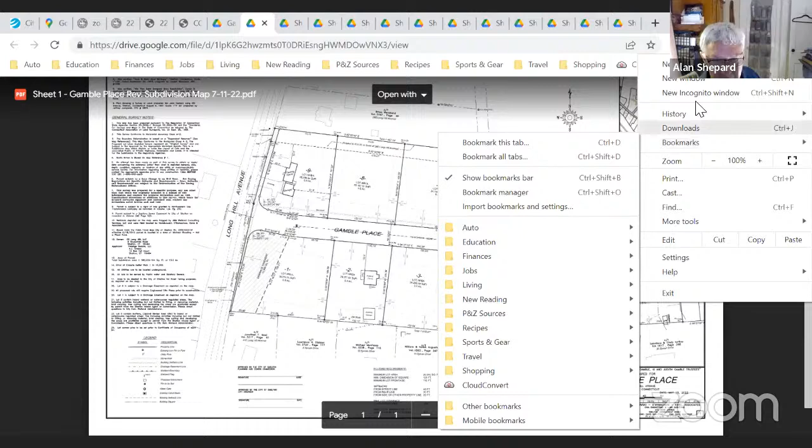The town engineer wanted some landscaping plans for detention areas. Mr. Shepard, before you go further, let's start with an overview of the whole project. Sure. Basically, this project asked for a zone change to R2 zoning because it seemed to make sense, and it also gave opportunity for a large half of the property to be given for open space, which made a lot of sense. It's coming off a long hill, the road we call Gamble Place. There are 9 lots, but 2 houses already exist, so really it's only 7 new additional building lots—a straightforward road, not very complex.

As you can see from the plan, there are 2 existing houses. Lot number 2 will probably be knocked down and rebuilt—it's kind of dated and old. Lot number 9 is fine and will stay. So basically, the layout is a dead-end cul-de-sac, giving about half the property away for open space.

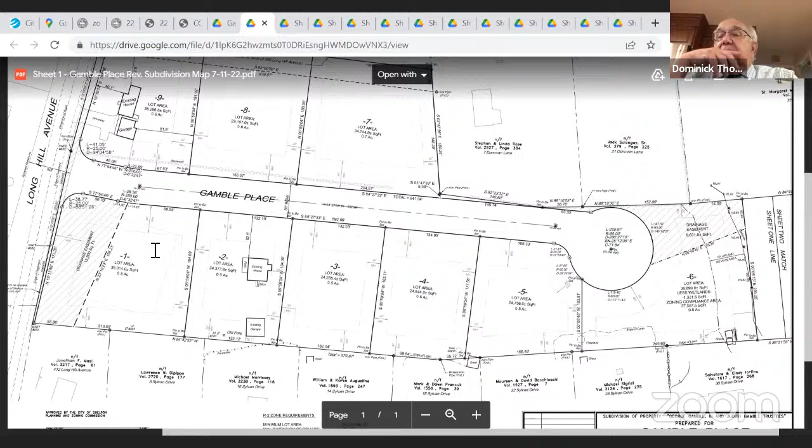What was that last section about, half the property for open space? Right, which you don't see on this map—it's on the other maps. The subdivision map is two sheets, so I want to mention there's another sheet showing the open space. There you go. So we have a large piece of open space all the way down to Constitution Boulevard.

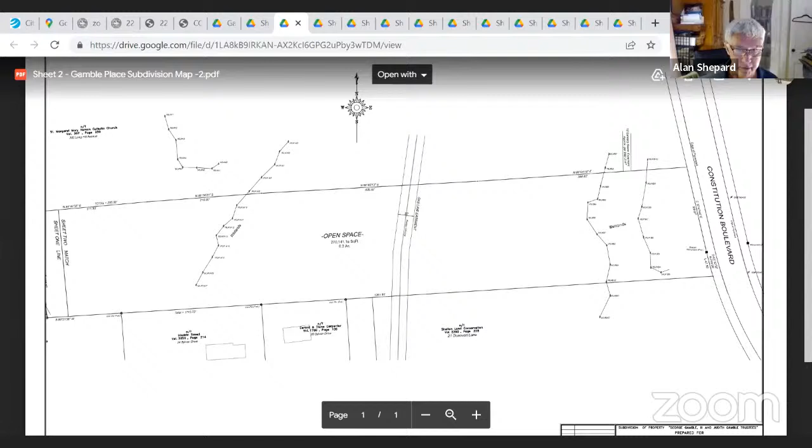That we don't, because of the zone change, we don't need to go down there. I think it's the best for all worlds. And it's in between other open space, and the church, so it makes sense to give the 6.2 acres.

Is that going to be conveyed to the city or to? To Shelton, whoever they want it to. Okay, yeah, we have no preference, whatever the city wants. Okay, no preference, all right.

Could you address this that's up on the screen about the Conservation Commission wanting a split rail fence along the boundary between lot 6 and the new open space, so that lot 6 is all the way down? We're fine with that. There's a pretty good slope and there's no reason to go past that slope.

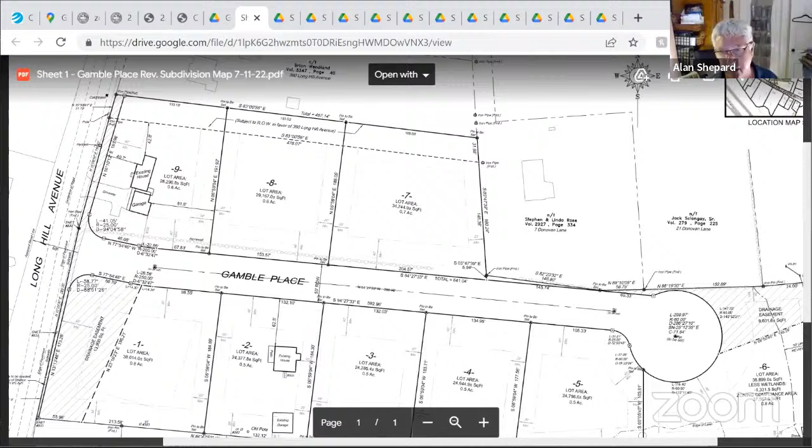So that's the last lot on the right. And if you take a look at lot 6, I drew the property line along the wetland line, so there's no reason to go past that line. That's a total slope, but a little split rail fence there, I don't think we have any problem doing that.

Who has to maintain that? If John lets you put the split rail fence in the wetland, yeah, I think he'd be okay with that. And even if we put it on this side of the property line, I don't think that'd be any problem. If we put it on lot number 6, it actually would be lot number 6's fence. But I doubt they'd maintain it per se, but at least you get them going for a while.

They, meaning the property owner? The property lot owner of lot 6? Yeah, it's more to designate the area. I think it's pretty well defined out there in the field, but it doesn't hurt. It establishes the property line so no one can say, oh, I didn't know.

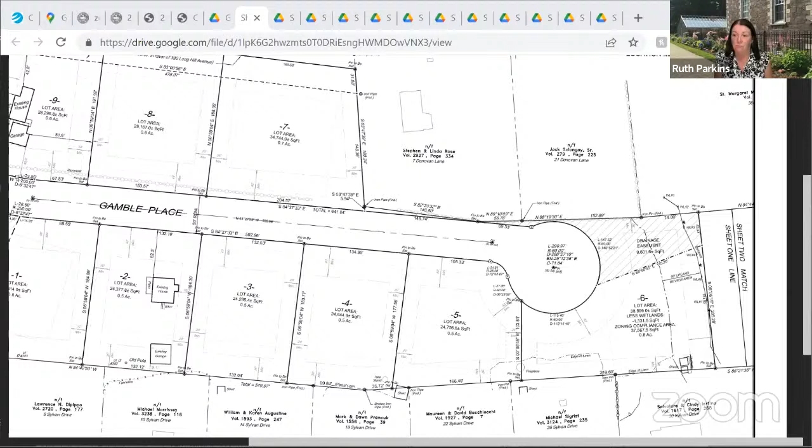Okay, well, somehow it should be deeded that that fence belongs to the City of Shelton so that they don't think it's their fence and can take it down and encroach. Yeah, that's what my whole point was, the encroachment has happened before. Right. Usually there are markers, as pointed out, that can be put on the fence to indicate that on the other side of the fence is the open space.

It would be a decision on the part of the Conservation Commission—well, they don't make decisions, they recommend—or the town, as to whether the fence is installed on the open space, which would make it the responsibility of the town to maintain, or put it on the side of the property owner, which would obligate the property owner to maintain it. Then there could be placards right on the split rail fence with the appropriate instruction that it is the borderline with the City of Shelton open space.

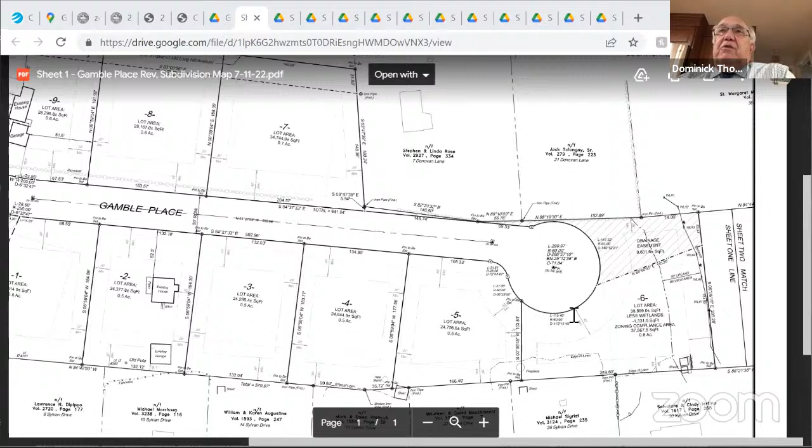Is there a formal inspection program that exists that checks things like this every so often? That would be a question for the Conservation Commission. Right, so who owns the other open space that this is abutting? I believe it's the Shelton land—if Alex can go to the open space map, I believe it shows it, it's the Shelton Land Conservation Trust.

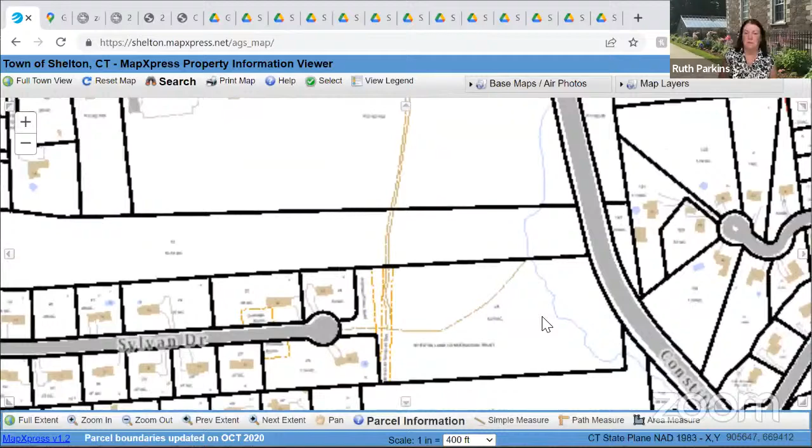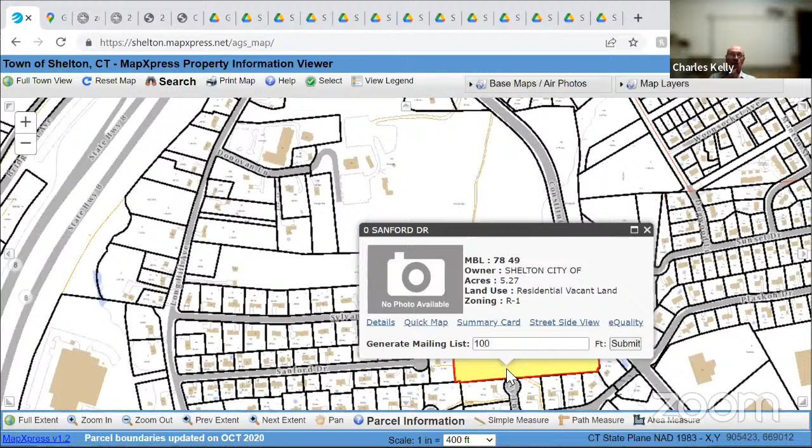So if the city deeds it to them, then they would become responsible for the fence. Correct. The other side is St. Margaret Mary, the other side is the Shelton Land Conservation Trust, which is the open space required for the PRD along Sylvan Drive. It would kind of make sense that it would be deeded over to them, but there's no guarantee the city will accept it. It's the city's choice. But they are, of course, under your subdivision regulations and statutes, one of the entities that can receive open space required for a subdivision.

I don't think we should put the responsibility of the fence onto the owner of the property, to be honest with you. No, true, I agree. Can we look at the subdivision map?

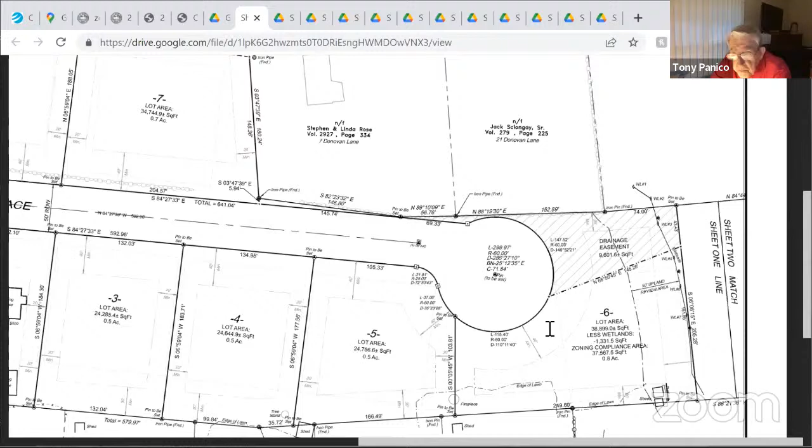Al, is there any reason why you shouldn't change the location of that rear property line to parallel the wetland line, so that the wetlands are all within the protected area? I guess I just picked that spot because it's at the toe of the hill, but there's no reason. If you change that line so that it follows the wetland line, it could be a straight line, then the fence on the line is not a problem.

Could you point that out on the map, what Mr. Panico is referring to? He's talking about the rear lot line for lot number 6. I went into the wetlands a little bit for the rear lot line, but it basically mimics the wetland line. What he's saying is just pull it off a foot or so off the wetland line.

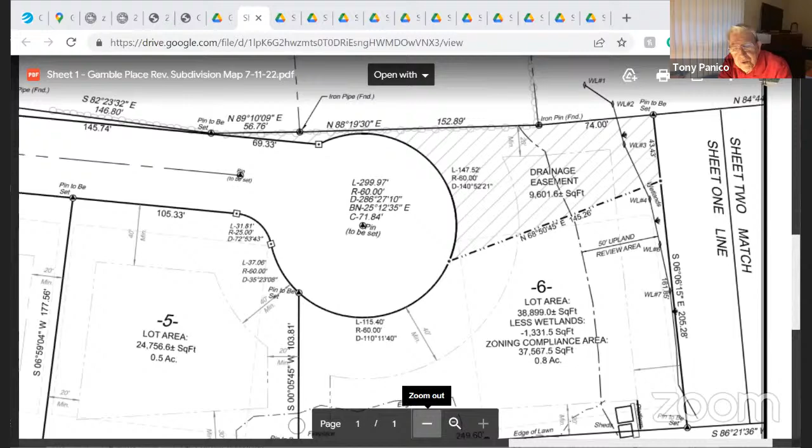While we're talking about lines, can I make a couple of other comments? I haven't spent a lot of time with this yet, but two things jumped out at me. Number one, the space between your cul-de-sac and the nearby piece of road is beyond the right of way of the road. It's in some kind of private ownership, and it would appear to be a blocking strip for those two adjacent properties. I think the right of way line of the road ought to be brought to the property line and follow it, because you've got this other triangular piece too, which looks like a blocking strip for that Rose property. That's one issue.

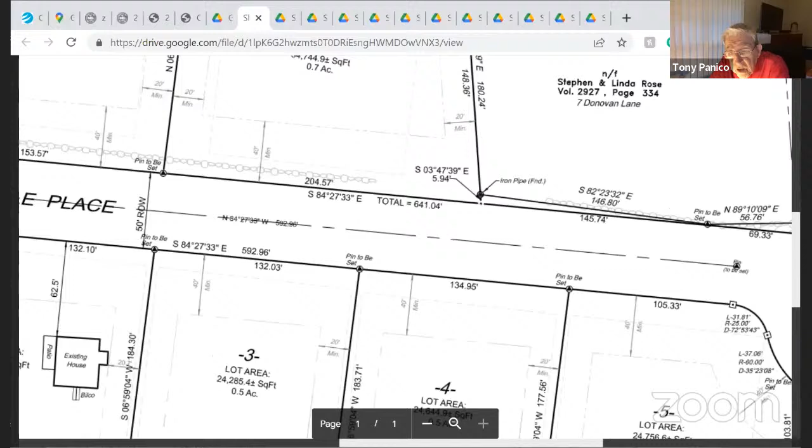The other issue, it seems rather obvious: you've got a stone wall paralleling this road, and yet you didn't put the right-of-way line of the road on the stone wall. So I think what you need to do is just make the right-of-way of Gamble Place a little bit oversized there and move that line to the stone wall.

I think with the grading, if you take a look at the grading plan, I'm more likely to maintain that stone wall where I have the road right now. I'm not saying move the road out, leave the road where it is, just make it a larger right of way. Just put the northerly street line on the stone wall.

I believe the Conservation Commission expressed some concern about protecting that stone wall also. Yeah, they did. So rather than having to go through creating a conservation easement to protect the wall, if the property line is on the wall, then the wall belongs to the city as much as the property owner.

Could I point out that lot number 9, I need that setback for the street line for the garage? Is that a problem? Yeah, I think so. Can we shift the map over to see that? So if you take a look at the garage setback, I got it pretty tight to the street line there.

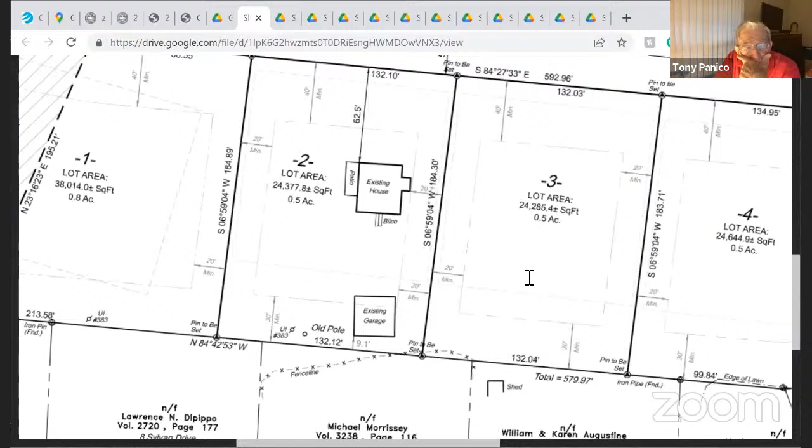Is that the 40 foot required street line in that zone? Lot 9 - I mean, 40 feet is a required street setback? Yeah.

So that's kind of, and I moved it over, but also the grading allows me to. Is there a change of grade along that wall? When I come in off of Long Hill, there's some, not much, but enough that if I tried to force it right up against the stone wall...

I wasn't suggesting, Al, that you change the construction of the road. You can leave the road exactly where you've designed it. Just draw the right-of-way line over at the stone wall, make it an oversized right-of-way. We could do that for lot number 8 and lot number 7.

Either that, or for lot number 9, we sponsor you for a variance from the ZBA. I think AJ has time considerations with people trying to get in with mortgages and stuff.

There's also a provision, I think, Al, in the zoning regulations that says when you have a lot on the corner of two streets, the street setback only applies on one side. That's for the smaller zone, not this zone. Oh, I think it applies anywhere. I'm just pulling this off the top of my head, I'd have to go back and look it up.

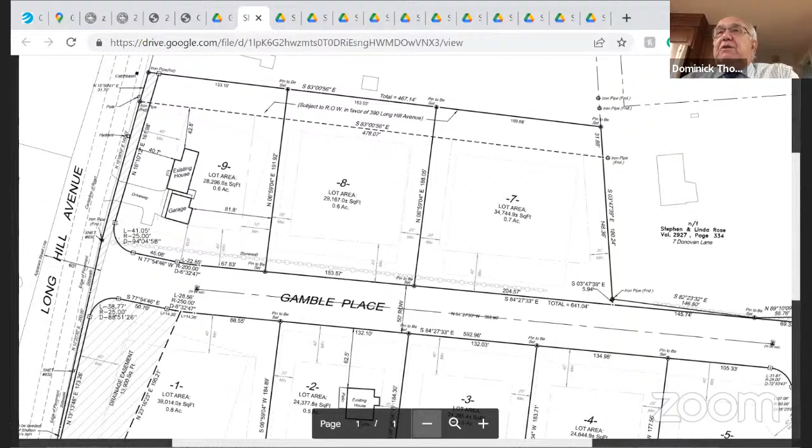That could be a condition in the deed. You'd have to put some kind of restriction. I kind of like that better. And with respect to moving the road line, I don't think the client wants to. I understand what you're saying, Tony, about those little pieces of property, but the client would rather keep the road line not on somebody else's property and leave the lines the way they are. There's a point where it goes across it, but would rather leave the area and the property. The whole point is we're not doing this to give access to other properties to the road or anything like that. Well, then protect it with an easement.

Excuse me, can I make a point? This is AJ Grasso, the applicant, living at 14 Red Tail Court in Shelton. The access—I don't see a need, both of those pieces of property, Tony Panico, that you're talking about, the one beyond lot number 7 and the one adjacent to lot number 6—they both have legal access on Donovan.

Well, I'm just telling you right now, we have specific requirements in the subdivision regulations that say you don't create blocking strips, and that has every impression of being a blocking strip. Well, it's not a blocking strip because they have access on Donovan. Of course it's a blocking strip to the back of that property. A blocking strip, yeah, well, they both have access on Donovan. All right, you want to defend it legally, Dominick, go ahead. Okay.

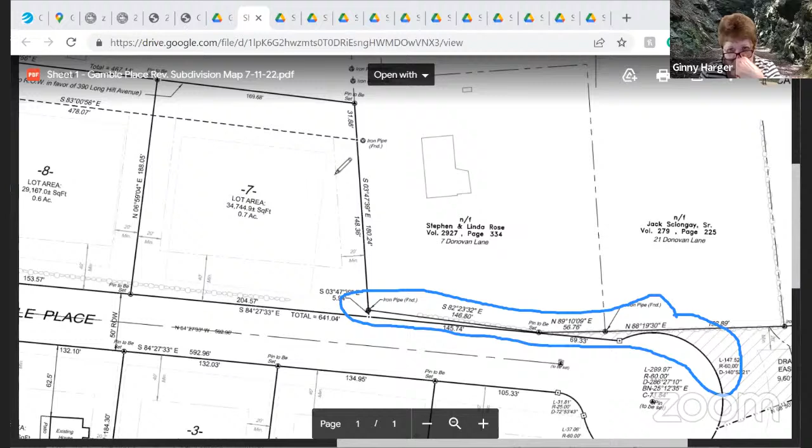Can we see more of the Sciongay property? I think it's a long property that goes all the way over to the road up to the church. Move it down. Yeah, the other way. The map doesn't go that far—it won't show on this map, right?

But the Rose and Sciongay properties have access from Donovan Lane. There you go, Sciongay's access is onto Donovan Lane. Okay, and it's obviously bigger than one lot—it's an oversized, large piece of property.

Click back on that. So they could divide it and then they wouldn't have access to a road? Is that what you're getting at?

No, I'm on that. It's been a principle of planning that when you lay out a subdivision, you don't create blocking strips to abutting properties.

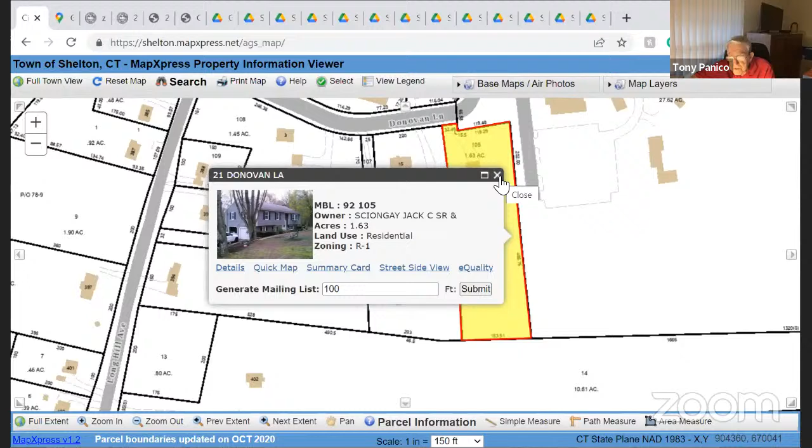And that's what we would be doing here with the map, the way it's currently designed. They have the acreage to split that lot in half if they could have access to the new road. But if they don't have access to the new road, they can't split that property because they'd have no access.

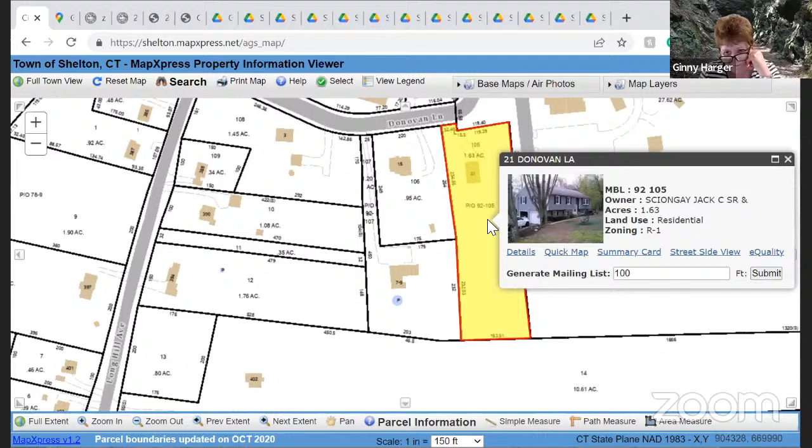That's right, which is why they don't have the acreage, and there are some other challenges associated there.

If you were successful in getting the zone change to that property line, I'm not sure it would be too difficult to extend that zone into that property, and then you have more than one lot. Well, exactly, that property was part of the zone change and was rejected.

Along with it, because they felt that it was gerrymandered at the time. But maybe it's consistent with an overall rethinking of that area. Personally, I agree it should have been included.

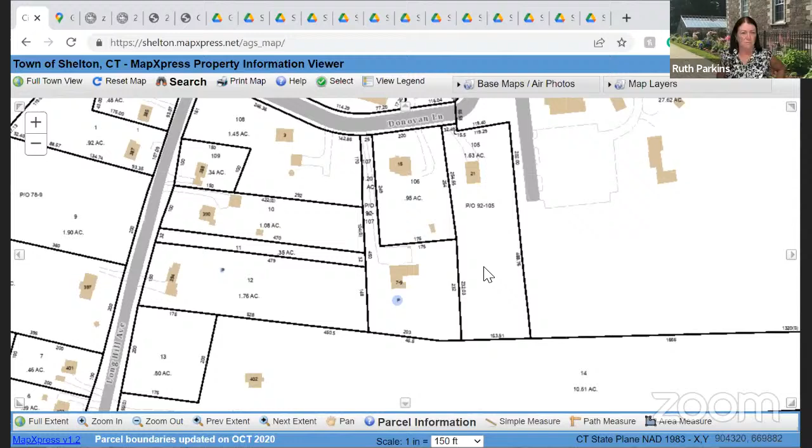I agree, Tony. So would the developer have any issues if at some point in the future there was a zone change and this particular Sciongay lot was able to be split with it having access to Gamble Place? It's a very simple thing to resolve.

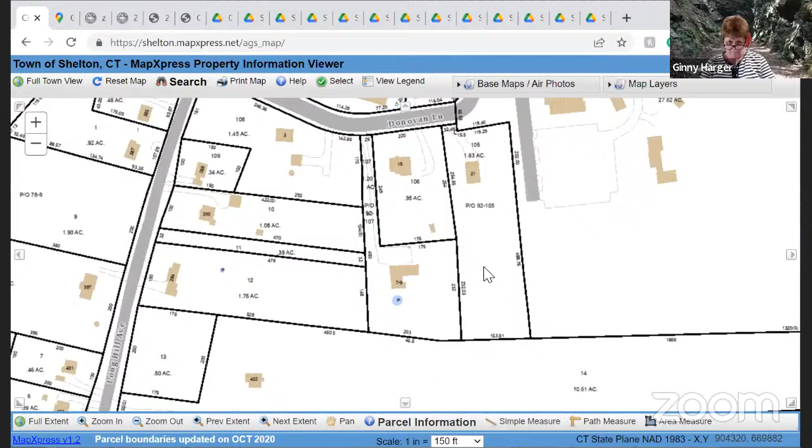All you need to do, if we can get back to the subdivision map, is whatever land is left between the future street line and the back line of Rose, convey it to Rose. And the same way on the next piece, draw a line and convey whatever intervening space there is to the property owner.

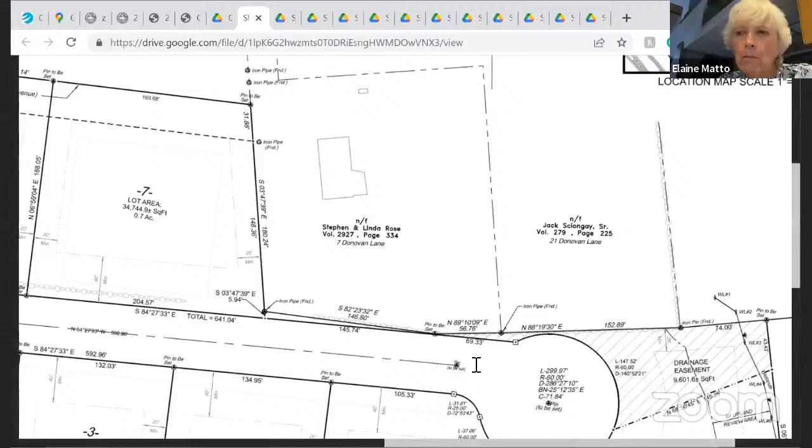Has that ever been done? Then you've eliminated any possible accusation of having blocking strips. Well, that doesn't give either Sciongay or Rose legal frontage on the street anyway.

It might, but I don't know if Rose is an interior lot to begin with. I don't know that either one of them become a lot with frontage because they don't. I'm not looking to create development potential for them. I'm just simply fulfilling a principle of subdivision design that you do not create blocking strips.

Blocking strips are from years ago. They were spite strips. We don't get spite strips anymore. There's a couple of things - these are not spite strips; spite strips prevent a property from having access to a right of way.

The Rose property is an interior lot. If you give them frontage and they want to all of a sudden change and put a driveway, then you're destroying a stone wall, because that's the only way they could do it, is get rid of the stone wall that they have on their property, which is the continuation of the other stone wall.

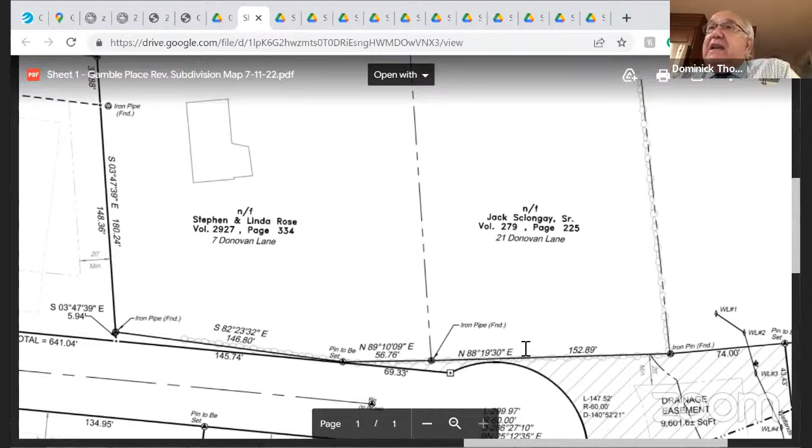The same thing, I believe, I'll defer to Alan. Along the Sciongay property, you have the stone wall on there. So where they don't need it or anything, if they're doing it, you're now giving them the opportunity to cut a driveway in and take down the stone wall. Well, you're doing that to other properties up above as well.

We're arguing circles for nothing. I don't see what the big problem is paying for that little bit of property. What's the problem? One thing in regards to, let's start with the Rose piece.

That would allow them to put a driveway off a new road that we created, which could impact the property owners on the new road. But is it going to be a public road, AJ? Yes. Then they should have rights to it.

How high are those stone walls? In other words, AJ, is it a spite strip? Well, no, they have a driveway to the house now.

I don't, but 100 years from now somebody might have a different idea. They might want to have a different house there, and they might want access to this particular road rather than the other way to go in. Exactly, and they would look back and say, how come that planning commission left the spite strip there?

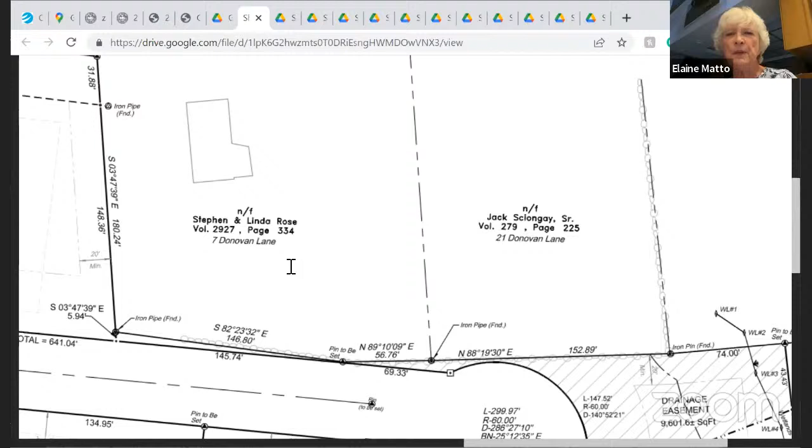I don't see why this is such a big issue. I don't see why you can't just do this. It's not a big issue... it's because those stone walls that are there.

Yeah, but there's stone walls up above as well. You're not going to do anything to the stone wall. It's talking about how you draw lines. That's all it is.

But are these stone walls of such historical significance that removing them in the future would just be for a driveway? Yeah, that's what I'm asking. You would think most people would want to keep a stone wall. It's the developers that tend to take them down unless they're told not to.

I think the stone wall is a different issue on this to begin with.

I'm not sure what the answer is regarding the garage. I believe for that house it faces Donovan, or it might be parallel. I'm not sure if it's perpendicular to that property line or not, so I don't know the answer to that. Maybe Dominick does. I don't know why we're getting hung up on the existing condition. Who knows what the condition is going to be like a year from now, five years from now, ten years from now?

As someone said a little while ago, somebody may decide they want to tear down the house and build a brand new house facing the new road. Are we saying we don't want that? We should, because if you are, then move the road away from the property line.

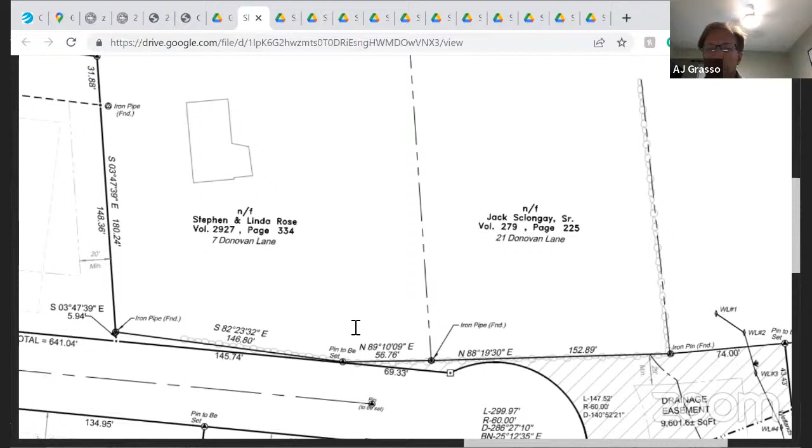Does that stone wall stop, or is it just because? Right, the stone wall has less to do with it, I think, than the reality that they can go to the left of that stone wall. Looking at the plan, if they want to put a driveway in, if that now connects.

Dominick, your thoughts? Yeah, I understand the position Tony is putting forth, and AJ's position is about not giving these people access to the other road when they in fact have access. Both lots of the Rose property—there's an interior lot and a front lot—both have access onto Donovan. So I don't treat it as a spite strip, because they have access. Spite strips are where somebody does not have access and you're depriving them of that access.

Under current zoning, I will admit, Sciongay can't have a rear lot—he has the house up front and doesn't have enough to qualify for the rear lot. I understand he could possibly get a zone change.

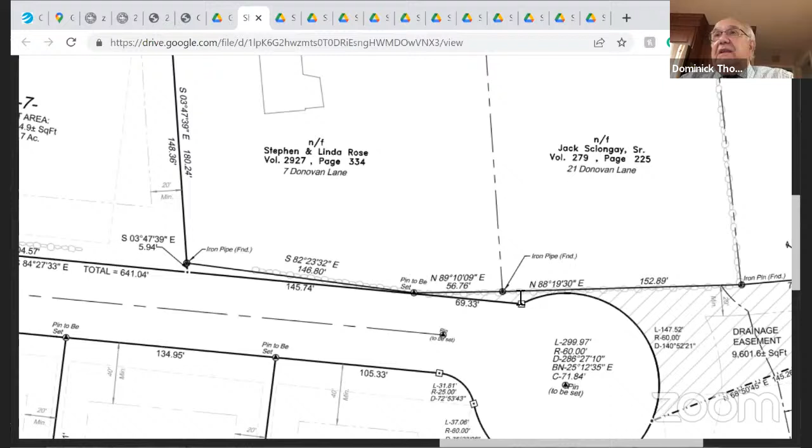I think the other thing, if you're going to—I'm not sure about the topography—but if there's the potential for curb cuts, these properties adding curb cuts or driveways off of it by having it touch would also have to be looked at. Not by the city engineer necessarily, but obviously they would have to go to the city to get permission to have curb cuts.

But again, AJ is the property owner. He's laying out the road like this. I don't think these are spite strips because there is access, and I don't think requiring him to do it would be an appropriate subdivision condition.

Okay, well, I get that he's paying to build the road, but it's going to become a city road and the city will be maintaining it. So a resident on that road should be able to have access to it—that would be my thought. I agree completely with Ruth and with Tony. Okay, well, if it's made a condition, the applicant will have to address it.

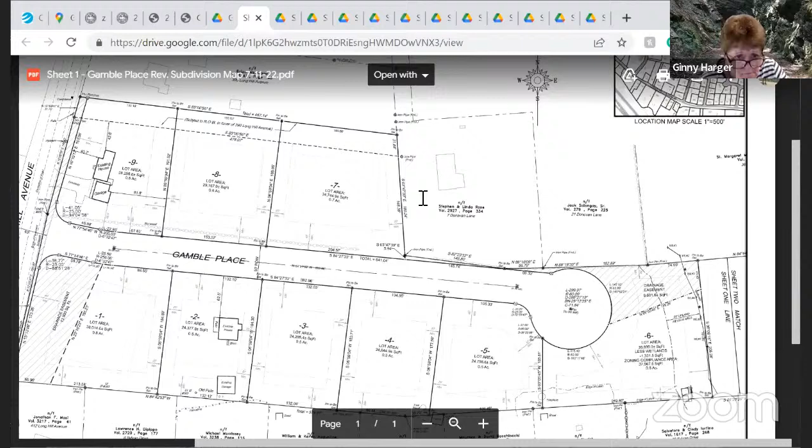Okay, anybody else want to comment on that particular topic? Okay, if not, Attorney Thomas or Mr. Shepard, do you want to move on? Was there something else? Do you guys want me to go over the comments from the town engineer real fast? Yeah, go ahead.

So the first comment was he wanted landscaping details for the detention areas, which we provided. Both detention areas are at a very mild grade, so they're not going to look like the typical riprap detention areas. You won't even know what their purpose is when you drive by. They're on lot number 1, you can see the drainage easement there, and lot number 6. So it'll look good going by, is my point.

We've increased the pavement width to 30 feet. We're going to ask for a waiver to go to 26 feet. I don't know how the board feels about that, but we made it 30 because that's the reg right now. We may feel out the board and see how you feel about it. So what you're saying is the road width right now is planned for 30, but you would be asking for it to be reduced to 26?

If there's some concessions with the board, we would like that. You have the requirement for pavement, which I think is completely excessive but benefits the asphalt companies, at 30 feet. A lot of towns have gone down to much lesser asphalt, less drainage issues. I don't think there's any issues here going down to 26 feet. But in your subdivision regulations, toward the end, you have the right to grant waivers if a waiver is requested. The client does not want to delay the approval, but it can be discussed, and if you have no problem with it, we can immediately submit the request for the waiver, or submit it orally as part of this application.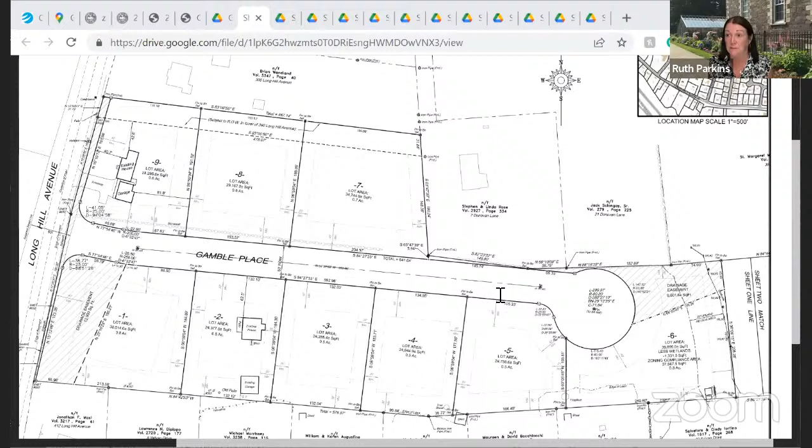I think the wider roads, especially in a small subdivision where people can't have 12 people park in their driveway, so people park on the street, then a 30-foot might be needed. But this tends to be just excess width that makes people drive faster, in my experience. No, I live on a 26-foot wide street and it's fine. That's a different opinion.

Yours is what, Elaine? I have my street at 26 feet wide. It's fine. And Mr. Shepherd, what were you asking for, reduction to 26 or 28? 26 feet. But like we said, it's up to the board, we'll go either way. My opinion is when you have 20,000 square foot lots, people can park in the driveway. When we're on reduced lots, I like the 30 feet. But on these lot sizes of a half acre and above, I like the narrower roads. But we'll go with whatever the town wants.

The 4 feet is not going to be added to any lot, correct? It's just a pavement width, doesn't affect property lines. Right. All right, we were going to ask for the reduced cul-de-sac, but I agree it's a dead end cul-de-sac, so we upped it back to the 50-foot radius. That's not a problem since it is a dead end street. You want a detail of a stop sign, that's not too exciting, and a stop bar, we added that. With the handicap detail for the sidewalk, we added that too.

We want a new bituminous curb along Long Hill Avenue and sidewalks, and we agreed to that. So we just put a note on the plan for that. There's a sidewalk along Long Hill Avenue already, but it's kind of old, so he wanted new ones on our side of the street, along our frontage.

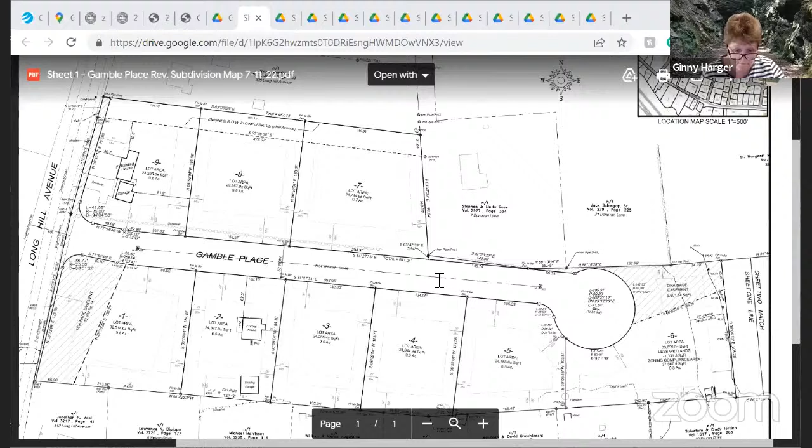So does any commissioner have any questions for Attorney Thomas, Mr. Shepherd, or Mr. Grasso?

Excuse me, can I make a point? The smallest lot we have here is a little over 24,000 square feet. We've got a lot that's over 34,000 square feet. It's a permanent dead end by giving away 6 acres to conservation.

I would like to ask that we go to a 26-foot wide road if at all possible. And also, if the commission wants me to bring those property lines adjacent to the road line, we will do that.

What was that last one again? So you wanted to bring what Tony Panico was asking for. The blocking strips? We will eliminate that. We can bring the road line to the property line. Okay.

So I guess, Al, what do you redraw? You'll redraw, you'll increase, you're going to basically gift that to them. How do you accomplish that? I would like to give it to the town first, because I'm not sure the property owner even wants it.

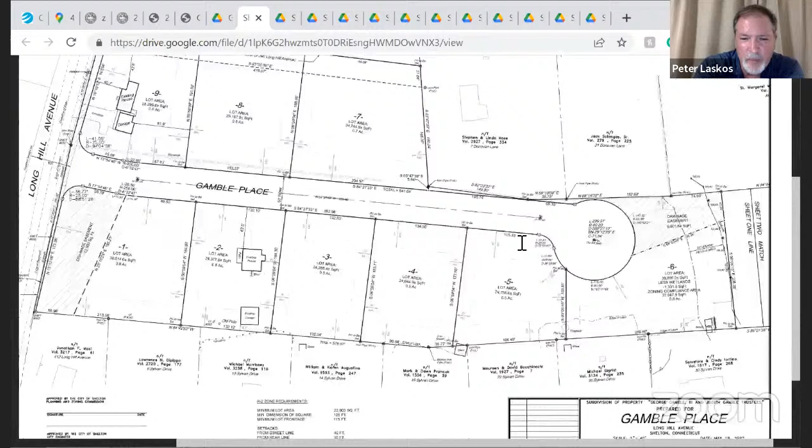They intruded. What's the proper way to handle that, Dominick? Well, there are encroachments that people would have to be given notices for, because it's going to become an issue when you go to sell the property. So if the property has been surveyed and marked, notices should immediately be given to the people encroaching that they are encroaching, and request they remove the encroachment.

Isn't there a statute of limitations on that? Adverse possession - they could potentially claim adverse possession under certain circumstances if it's been there for 15 years. So if they have a permit for the shed pulled 15 years ago, they don't have to move it? Not necessarily - if they don't have a permit for the shed, that's a separate issue. But if they put the shed down across the property line, they still have to comply with certain other requirements to establish their claim of adverse possession.

Okay, so they can make the claim of adverse possession. If they do, it can be handled in several ways. Most people want to move the stuff onto their own property. If not, there could be a lot line adjustment or something like that. But the first step at this point is to put the people on notice that they are encroaching across the property.

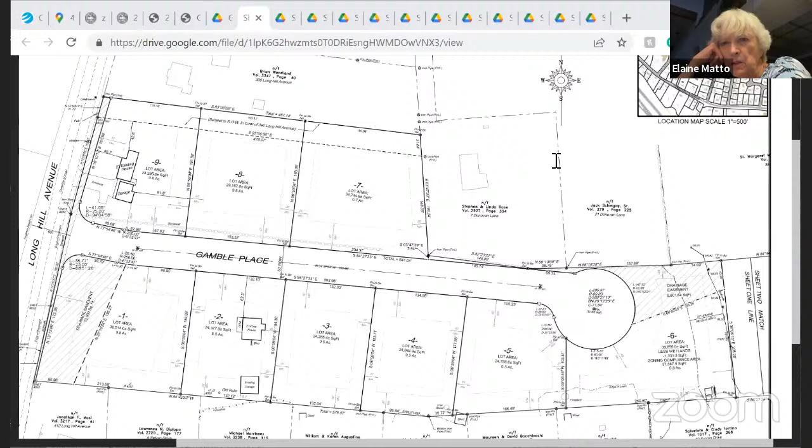Since we're on that topic, what do the other commissioners feel about reduction to a 26-foot wide road? I'm fine with it. Yeah, I'm fine with it as well. Yeah, I could live with that for sure. Commissioner Kelly, you're the only one I didn't hear from.

Is there anybody else that wants to address the commission or the applicant on this? All right, so...

Do we have a consensus as to whether or not we should direct staff to prepare a favorable resolution on this or not? I would think so, with those stipulations we've been talking about. Commissioner Matto, Commissioner Laskos are in agreement. Commissioner Parkins, agreement. Commissioner Ticky, agreement, yes. Commissioner Kelly, agreement. Okay, all right.

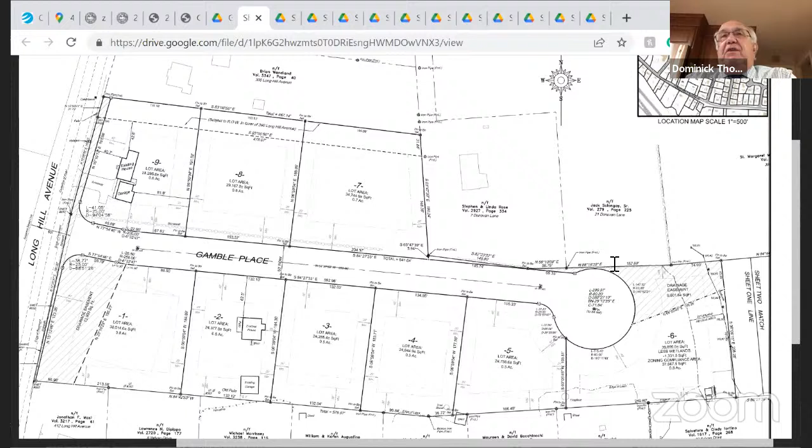So staff, I know there are some issues that Mr. Shepherd, Alan Shepherd, pointed out. There are some issues actually at the present time. The applicant has individuals who are anxious to sign contracts and move forward. I know you'd normally wait until your August meeting, which is on August 9th, but if at all possible, since it's just a resolution, if you could see fit to add the reading of the resolution and the voting on it to the July meeting, it might be helpful.

We're going to have to confer with staff as to what we have penciled in for upcoming subdivisions. That's a relatively simple decision. It may take the place of one of your other projects, Dominick. I think Alex has a standard form. It's obviously going to, but no, it's really a 10-minute item.

So that's all I was saying. We do have to give Mr. Panico time to develop the resolution, so keep that in mind, and staff will get back to the applicant as to when this can be. We understand the urgency having to do with paperwork for the mortgages and all that.

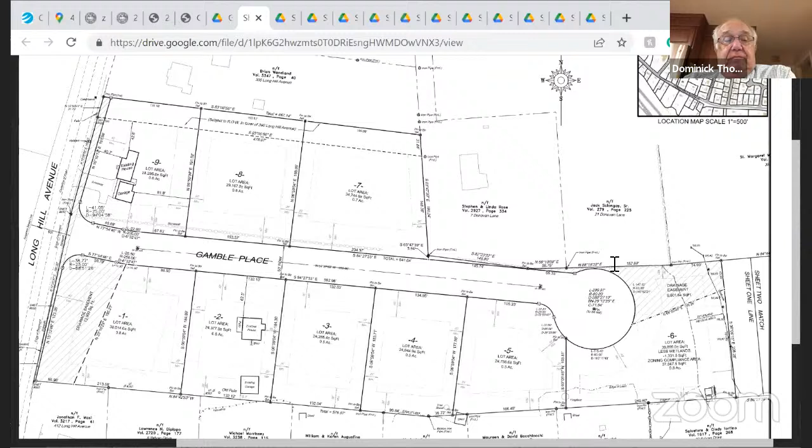So, all right, it's a consensus of the commission for staff to prepare a favorable resolution, and the meeting where it would actually be voted on will be indicated to the applicant by staff. So, before we move on, anything else we need to talk about with Gamble Place, Long Hill Avenue? Okay.

Attorney Thomas, you're on mute. Were you trying to say something?

Yeah, if you noticed, I stayed for this subdivision application, and I wanted to point out to the commission that if you look at a bird's eye view of this area, whether by drone or aerial flyover, the exception has pretty much gobbled up the rule here. You've got a situation where the commission down the road should consider changing this area from an R1 to an R2, in my opinion, because every lot there seems almost to be an R2 type situation.

I don't think it should be done as part of this subdivision. In fact, it can't be. But it is something I think the commission should consider, and I'd be glad to scope out the area that should be changed. I think it should go all the way down to Constitution Boulevard, because you have a situation twice now where you're approving lots down in size in an R1 zone. So you're treating it as an R2 zone for practicality purposes. You might as well have the rule be R2 rather than the exception be R2.

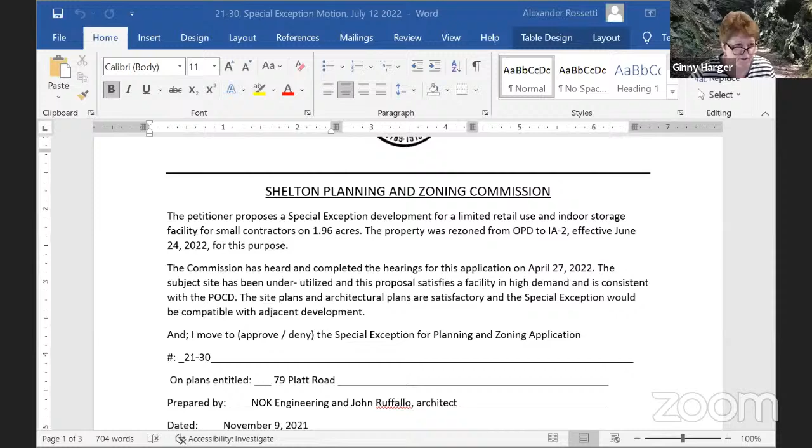Did you email that to each individual commissioner? Yes. Is that today? Exit, go full screen and into your inbox. Yeah, he's got it up on the screen though, right? Okay, yeah, all right, I'll go back to the screen. Whoops.

Okay, you want to read it? You want Commissioner Matto to read it? How do you want to do this? Oh, I gotta find... I need to get some more water.

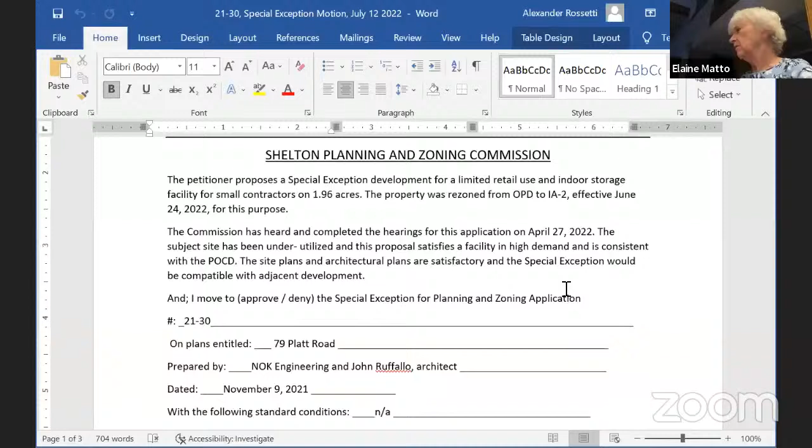As the chairman mentioned, this is for application 2130, a special exception application for a limited retail use and indoor storage facility on 1.96 acres. The property was rezoned from OPD to IA2 effective June 24th, 2022 for this purpose. As you'll likely remember, the commission split up these two applications to address the zone change first and then move forward with the special exception application.

We received updated elevations from the applicant regarding the two dormers to reflect the same side of the buildings, and everyone had been okay with the site plan and rear areas of the site plan. So we have received those updates, and of course, when the applicant comes in for permits, they'll need to go through the engineering, wetland, zoning, and building departments for the necessary permits.

The commission has heard and completed the hearings for this application on April 27th, 2022. The subject site has been underutilized, and this proposal satisfies a facility in high demand and is consistent with the plan of conservation and development. The site plans and architectural plans are satisfactory, and the special exception would be compatible with the adjacent development.

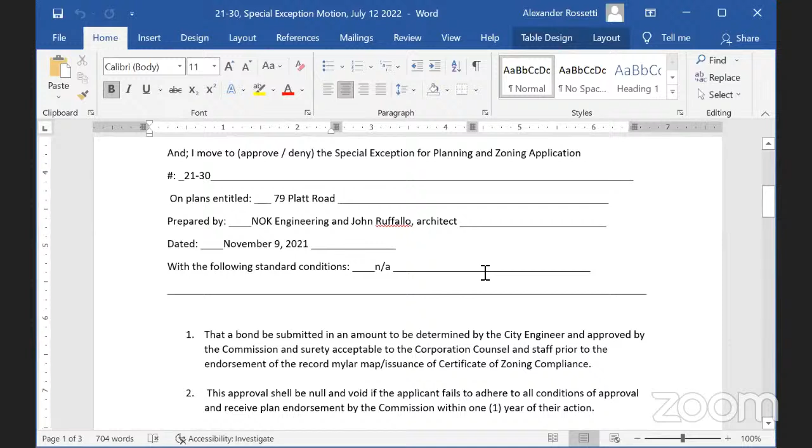So if there's a commissioner who would like to move to approve or deny the special exception application for P&Z application number 21-30, on plans entitled 79 Platt Road, prepared by NOK Engineering and John Ruffallo, architect, dated November 9th, 2021, with the following conditions.

A bond must be determined in amount to be determined by the city engineer and accepted by the commission, and surety by corporation counsel prior to sign off on the record Mylar maps. The approval shall be null and void if the applicant fails to adhere to all conditions of the approved endorsement by the commission within a year.

The approval shall be null and void if the construction and site improvements are not completed within 5 years of the date. Revisions and modifications are subject to the city department's review and may require action by the commission. Failure to notify the staff may result in a stop work order or other sanctions. The planning and zoning admin or city engineer must be notified 48 hours in advance prior to start of construction.

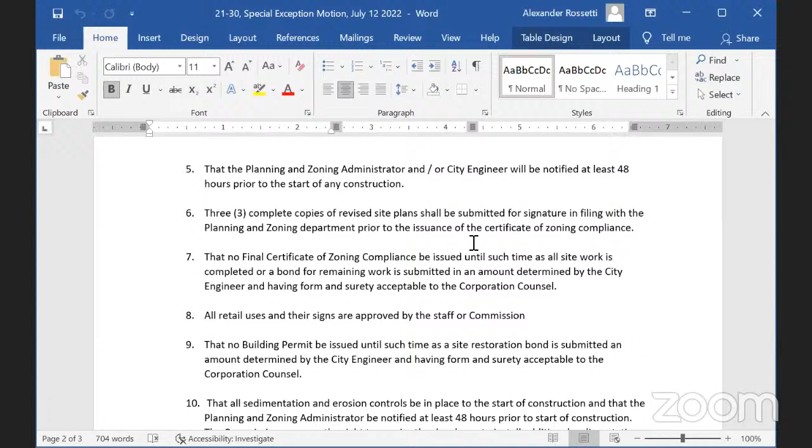3 copies of the revised site plan must be filed with our office prior to a certificate of zoning compliance being issued. No final CZC will be issued until such time as all site work is completed or a bond for the remaining work is submitted to the city. All retail uses and signs will be approved by staff and or the commission.

No building permit will be issued until such time as the site restoration bond is submitted in an amount determined by the city. All sediment and erosion controls will be installed prior to construction, and the commission reserves the right to require and request additional sedimentation and erosion control. Again, this site does not need much because it's already predominantly covered.

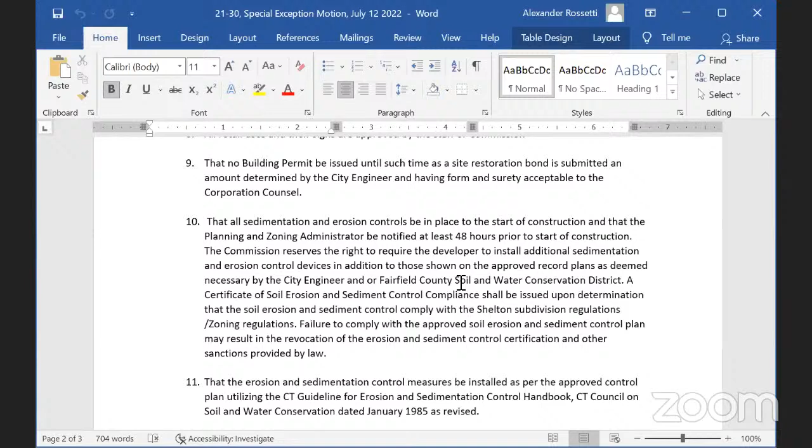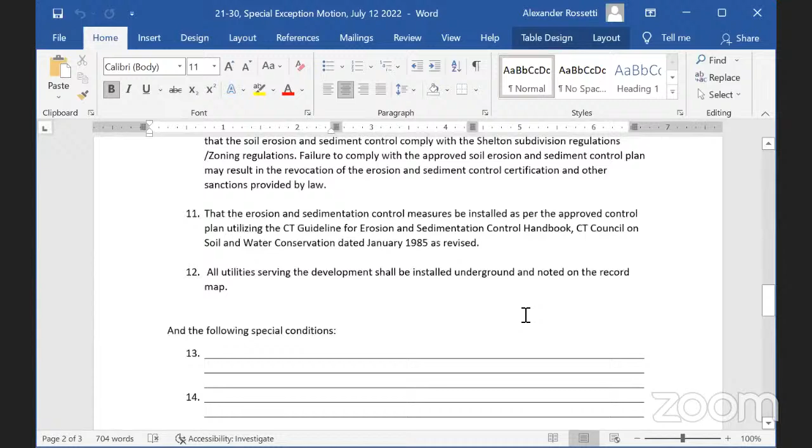Failure to comply with the approved soil and erosion control plans may result in the revocation of the erosion and sediment control certification and other sanctions provided by law. They will be installed per the state handbook, and all utilities serving development will be installed underground and noted on the record map. If there are any other special conditions, commissioners would like to add.

Alex, can you go back to number 8, please? I think I would like to see that expanded: all retail uses and their signs are approved by the staff or commission prior to any installation, or any manufacturing or installation.

Or the manufacturer thereof, fabrication or installation. That's the word. Prior to any fabrication or installation, yeah, perfect. I thought there was another one.

Just to point out that you had said for number 1 that the bond would be submitted in an amount determined by the city engineer and acceptable to corporation counsel. Does any commissioner have any modifications they would like to suggest for this?

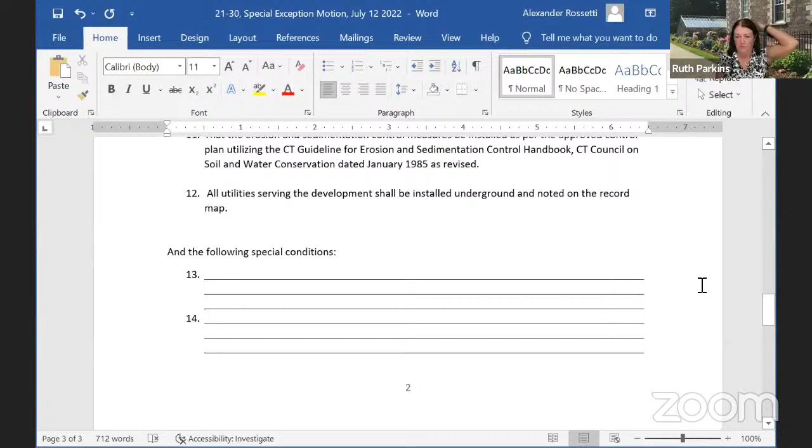I did not, but I will move for approval. Please get the motion on the table. Wasn't there a line up above at the very beginning? Yeah, there was. So I move to approve the special exception for planning and zoning application 21-30.

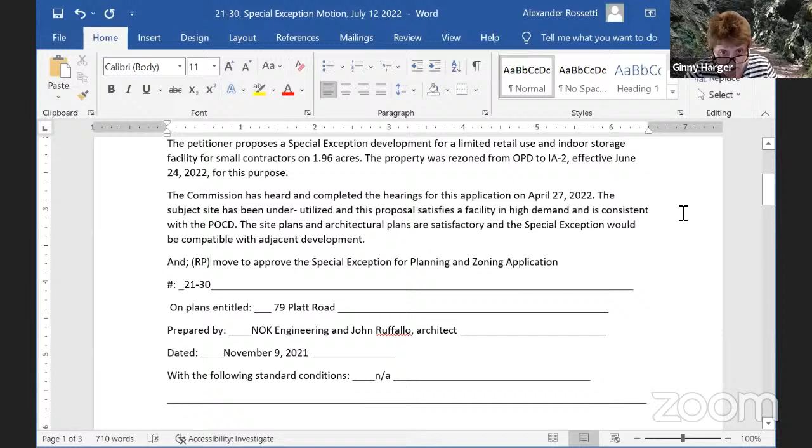Very good. Is there a second? I'll second it. So it's a motion to approve with the conditions set forth from Commissioner Parkins, seconded by Commissioner Kelly. Before we go on, what happened to the screen? Just had to type, hang on one second.

Mr. Panico, did you have any comments, questions, or concerns? No, Alex and I have been talking about this for the last couple of months. There's always last minute odds and ends that need to be taken care of, but they're purely administrative and staff will take care of them. So you're comfortable with the way the motion is worded? Yes.

On the motion from Commissioner Parkins, seconded by Commissioner Kelly for approval, I'll do a roll call. Commissioner Ticky, aye. Commissioner Matto, aye. Commissioner Lascos, aye. Commissioner Kelly, aye. Commissioner Parkins, aye. And the chair votes aye. Motion has been approved 6-0.

All right, we'll move on to old business item B. Application 2206, PDD number 101, Good Guys Development LLC at Petromont Lane and 275 Quorum Road, Assessors Map 66, lots 22 and 23, for a major modification of PDD number 101, 400 apartments with on-site parking.

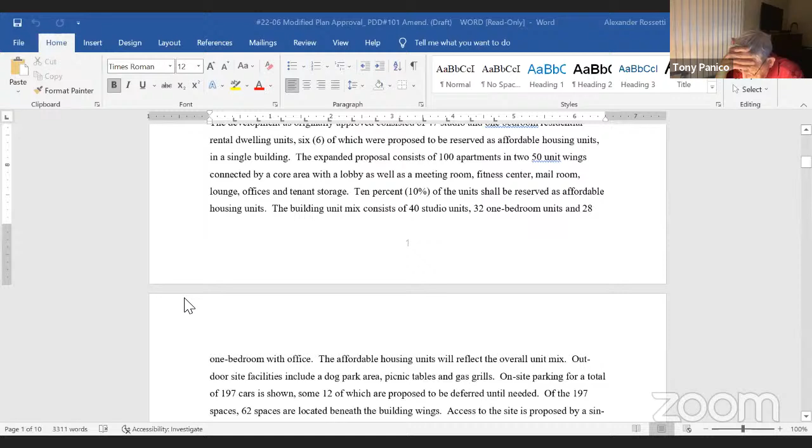The property is currently owned by the petitioner. The development as originally approved on PDD 101 consisted of 47 studio and one-bedroom dwelling units, 6 of which were proposed to be reserved as affordable, in a single building. The expanded proposal consists of 100 apartments in 2 50-unit wings connected by a core area with a lobby, as well as a meeting room, fitness center, mail room, lounge, offices, and tenant storage. 10% of the units will be reserved as affordable housing units.

The mix proposed consists of 40 studios, 32 one-bedroom units, and 28 one-bedroom plus office. The affordable housing units will reflect the overall unit mix. The outdoor site facilities include a dog park, picnic tables, and gas grills. There's on-site parking for a total of 197 cars shown, 12 of which are in an area they would like to defer until needed. Of the 197 spaces, 62 are located beneath the building wings, and the rest are open.

Access to the site is proposed by a single median divided driveway connection to Coram Road, with the potential for a separate emergency connection to Petromont Lane. The proposed building is positioned at the interior corner of the site with adequate setbacks from all property and street lines.

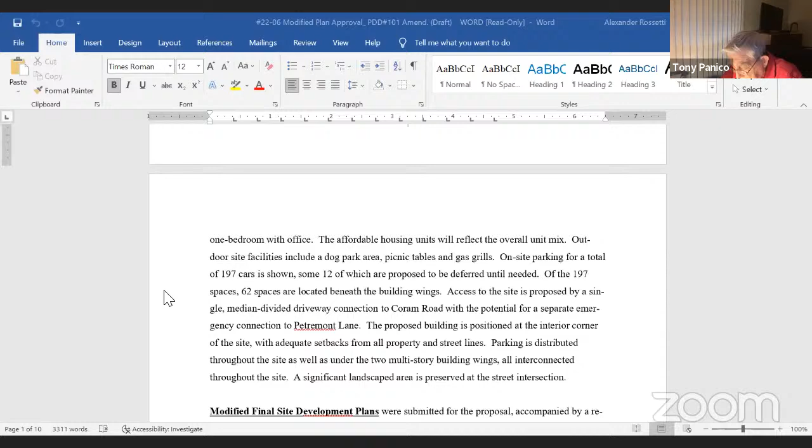Parking is distributed throughout the site as well as under the two multi-story building wings, and it's all interconnected throughout the site. A significant landscape area is preserved at the street intersection.

Modified final site development plans were submitted for the proposal, accompanied by a revised statement of uses and standards. Said plans are entitled 'Final Site Development Plans for Multifamily Residential PDD 101, Clock Tower at Petromont Place,' 275 Coram Road and 0 Petromont Lane, Shelton, Connecticut, prepared for Good Guys Development LLC by Rose-Tiso and Company LLC, Architects and Engineers, dated 6/3/2020, revised to 3/10/22. Also submitted was a site engineering and design report prepared by Manuel Jose Silva, professional engineer of Rose-Tiso and Company LLC, dated February 28, 2022, and the traffic impact study by KWH Enterprise LLC, dated February 2022.

The commission convened and concluded a duly noticed public hearing on April 27, 2022, at which hearing there was only one comment expressed by the public, and it was relative to stormwater discharge from the site.

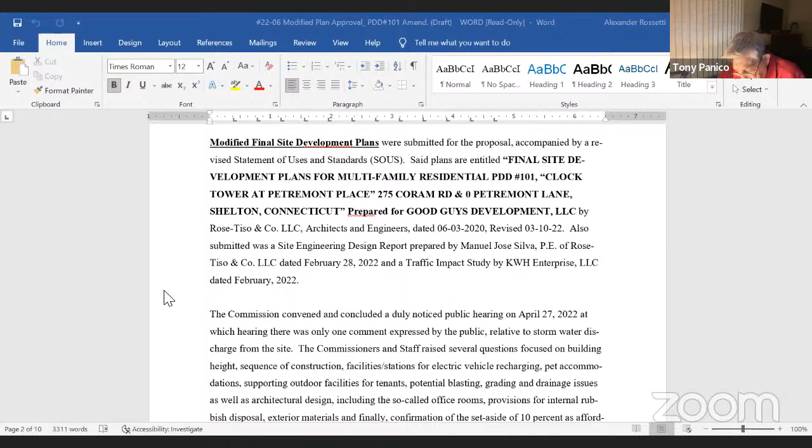The commissioners and staff raised several questions focused on building height, the sequence of construction, facilities and stations for electric vehicle recharging, pet accommodations, supporting outdoor facilities for tenants, potential blasting, grading and drainage issues, as well as architectural design, including the so-called office rooms, provisions for internal rubbish disposal, exterior materials, and finally, confirmation of the set-aside of the 10% as affordable units that meet the State of Connecticut requirement.

The applicant attempted to address all the comments and concerns of the commission and the public at the hearing. The applicant noted that if necessary, any and all other concerns of the commission can and will be addressed more fully to the satisfaction of the commission and all other responsible boards and commissions prior to endorsement of the modified final site development plans.

The commission has reviewed the subject modified final site development plans and is familiar with the area, existing site conditions, and area traffic patterns. It has considered how the site is proposed to be developed, public comments expressed, the existing land uses and zoning of adjacent parcels, and its impact on development of the subject site, and the concerns expressed by the commission at the public hearing and in its deliberations, and notes the following observations and findings.

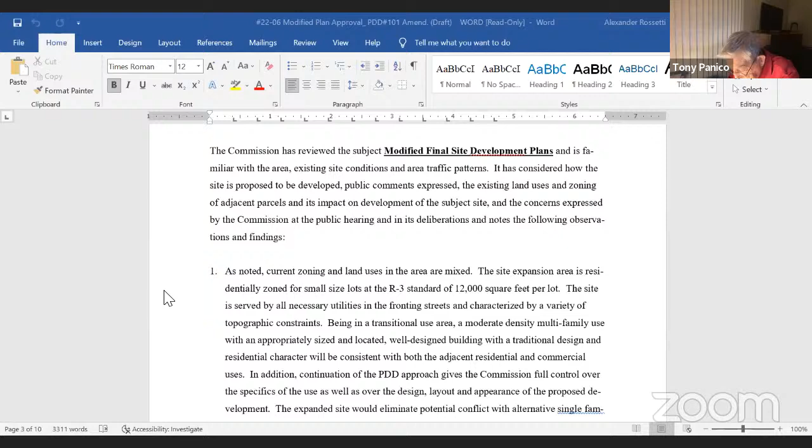In addition, continuation of the PDD approach would give the commission full control over the specifics of the use, as well as over the design, the layout, and appearance of the proposed development. The expanded site would eliminate potential conflict with alternative single-family development that might occur on that portion of the site adjacent to Coram Road.

Number two: the subject 3.54 acre site is roughly rectangular in shape, and it's somewhat impacted by topographic constraints. Development of the site must be carefully designed to produce an attractive solution and an appropriate transition between different land uses.

Required utility services continue to be available on Petromont Lane as well as now on Coram, and all on-site utilities will be located underground. All stormwater runoff will be collected and conveyed to underground galleys for detention and cleansing prior to discharge to the existing stormwater drainage system in Petromont Lane. There are no inland wetland regulated areas on site; however, the initial Inland Wetland Commission approval of proposed grading and off-site discharge has been received. The approval of the Shelton Water Pollution Control Authority for the proposed discharge into the sanitary sewer system has been applied for and is awaiting final WPCA approval.

Three: although a thorough discussion of Petromont Lane physical conditions and traffic flow patterns confirmed the position of the commission that, regardless of the relocation of the proposed entry to Coram Road, Petromont Lane must be improved.

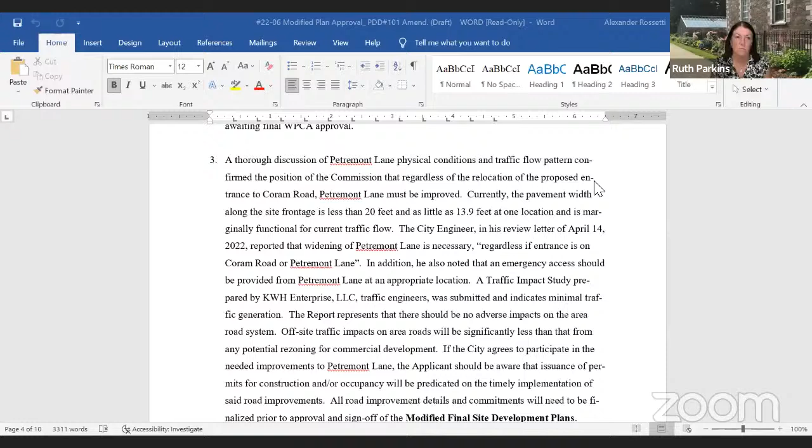The city engineer, in his review letter of April 14, 2022, reported that widening of Petromont Lane is necessary, quote, regardless if entrance is on Coram or Petromont. In addition, he also noted that an emergency access should be provided from Petromont Lane at an appropriate location.

The traffic impact study prepared by KWH Enterprise traffic engineers was submitted and indicates minimal traffic generation. The report represents that there should be no adverse traffic impacts on the area road system. Off-site traffic impacts on area roads will be significantly less than that from any potential rezoning for commercial development.

In other words, if the applicant had sought a commercial proposal, it would have generated far more traffic than the residential one does. If the city agrees to participate in the necessary improvements to Petromont Lane, the applicant should be aware that issuance of permits for construction and/or occupancy will be predicated on the timely implementation of those road improvements.

All road improvement details and commitments will need to be finalized prior to the approval and sign off of the modified final site development plans.

Four, the final mix of units proposed will be 40 studio units, 32 typical one-bedroom units, and 28 one-bedroom plus office units. The 100 units must include not less than 10 units allocated as affordable units in compliance with requirements set forth in the Connecticut General Statutes and consistent with the overall unit mix.

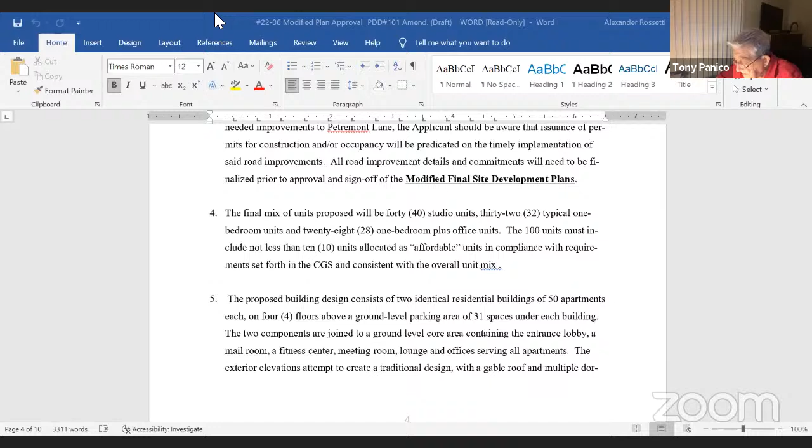The exterior elevations attempt to create a traditional design with a gable roof and multiple dormers, utilizing architectural asphalt roof shingles and an exterior of thin brick masonry elements, horizontal vinyl clapboard siding, and vinyl shingle siding, as noted on the elevations and represented on the rendering that was provided.

Some further modification will be required for clarification primarily, and possible expansion of the masonry components and the introduction of some partial screen walls at the building end walls, in an attempt to minimize the visual impact of the parking that occurs beneath those buildings.

The overall building height from ground level to the top of the roof is approximately 59 feet, except for the 2 roof features above the elevator shafts, which of necessity project a little higher.

Further specifics concerning the exterior materials and finishes, including samples, may be required, and revised detailed architectural drawings must be prepared for submission to satisfy the conditionally approved modified final site development plans. There are just some architectural elements that I could not quite understand from the drawings, and I need to have them explained to me.

Number 6, the commission notes that the site plan layout is generally acceptable, subject to minor clarification and detail. First of all, the site curbing is labeled as, quote, extruded concrete curbing, typical, unquote. It should be specific as to Portland cement concrete, since the detail sheet only shows bituminous concrete lip curbing.

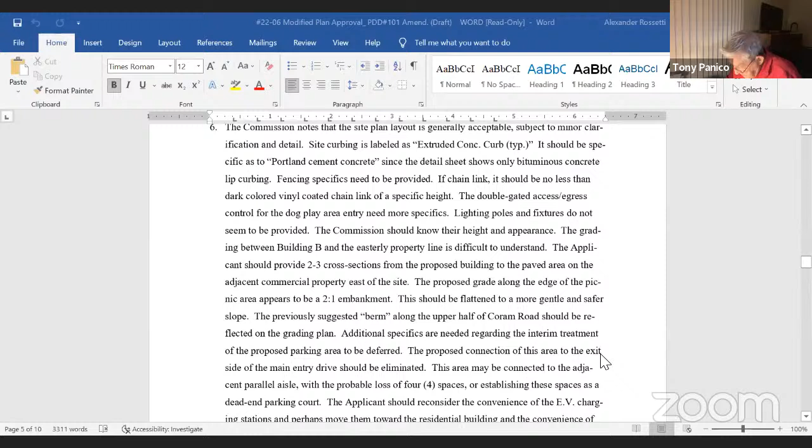Additional specifics are needed regarding the interim treatment of that proposed parking area, to be deferred if in fact that's what happens. The proposed connection of this area to the exit side of the main entry drive should be eliminated—it's not a good place for it. This area may be connected to the adjacent parallel aisle, with the probable loss of 4 spaces, or establishing these spaces as a dead-end parking court.

The applicant should reconsider the convenience of the EV charging stations and perhaps move them over toward the residential building and the convenience of its elevator access.

The landscape plan will require further strengthening and revision, as well as more notes. The tree size should be increased slightly to, say, 3 to 3.5 inch caliper, with a slight reduction in spacing considered. There aren't an awful lot of them, so they should be more substantial. Additional enhancement of the entry drive should also be considered.

The applicant needs to explain to someone, to me, the purpose of a 6-foot fence that's shown from the end of the retaining wall out to Petromont Lane. I'm not quite sure the purpose or the function of that fence, and I need to have it explained.

All of these various concerns, however minor they are, need to be addressed on the modified final site development plan, and achieving those solutions should include commission and staff involvement when necessary.

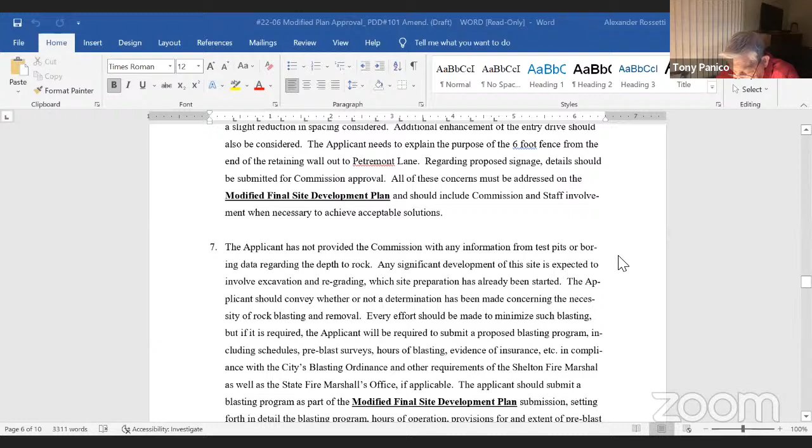The applicant has not provided the commission with any information from test pits or boring data regarding the depth to rock. We still don't know anything more about it. Any significant development of this site is expected to involve excavation and regrading, which site preparation, by the way, has already been started. The applicant should convey whether or not a determination has been made concerning the necessity of rock blasting and removal. Every effort should be made to minimize such blasting, but if it is required, the applicant will be required to submit a proposed blasting program, including schedules, pre-blast surveys, hours of blasting, evidence of insurance, etc.

All in compliance with the city's blasting ordinance and other requirements of the Shelton Fire Marshal, as well as possibly the State Fire Marshal's office. The applicant should submit a blasting program as part of the modified final site development plan submission, setting forth in detail the blasting program, the hours of operation, the provisions for and the extent of pre-blast surveys, blast monitoring, the times of blasting, and insurance coverage, etc.

So it's paramount that they find out where and how much rock they're going to be dealing with, and how much of a program we need to have to cover it.

Number 8: the plans were referred to the fire marshal, the WPCA, the police department, and the city engineer for their review and comment. The city engineer worked with the applicant to address the major concerns or reservations with the stormwater management system. All final outstanding concerns of staff and municipal departments must be addressed prior to commission endorsement of the modified final site development plans.

Number 9: the statement of uses and standards needs minor revision and modification relative to the area dealing with permitted uses, the area dealing with the zoning compliance table, the section dealing with parking, and some provisions relative to signage, in order to clarify certain language and to assure consistency with the context of the currently adopted statement of uses and standards presently applying to PDD 101.

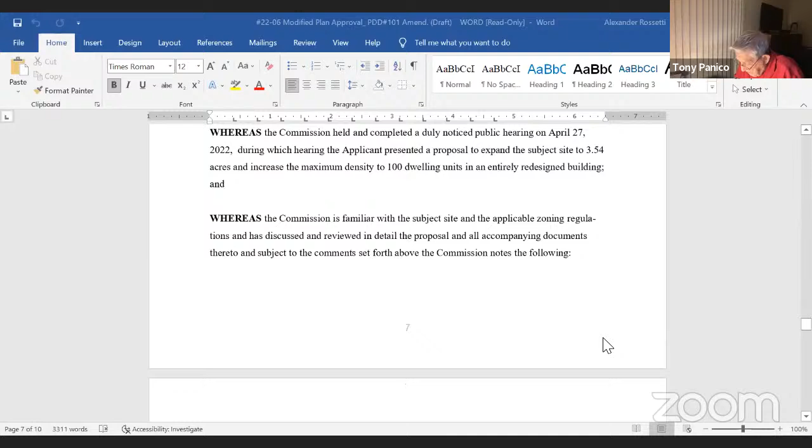Whereas the commission is familiar with the subject site and the applicable zoning regulations, has discussed and reviewed in detail the proposal and all the accompanying documents, and subject to the comments set forth above, the commission notes the following: 1, the application complies with the applicable zoning requirements and the specific provisions and stipulations of PDD 101 as proposed to be modified. 2, necessary final approvals of inland wetlands, water pollution control, and the city engineer will need to be confirmed, and a favorable report has been submitted by the fire marshal.

Modified final site development plans will require further modification and revision to address concerns and limitations set forth above. All concerns identified during the ongoing review and plan modifications need to be resolved prior to the submission of modified final site development plans for the commission's endorsement of its approval.

3, the site is currently vacant and it is characterized by variable topography with all necessary utilities available at the site. The proposed stormwater management plan satisfies the city ordinance, adequately addresses stormwater drainage issues, and proposes to discharge into underground galleys prior to connecting to the existing system in Petromont Lane.

4, the expanded site is positioned in a transitional location between and opposite developed commercial uses. The expanded development proposal and residential apartment building design is subject to careful review and control under the provisions of a Planned Development District, assuring it will successfully transition from the commercial development to the single-family residential development.

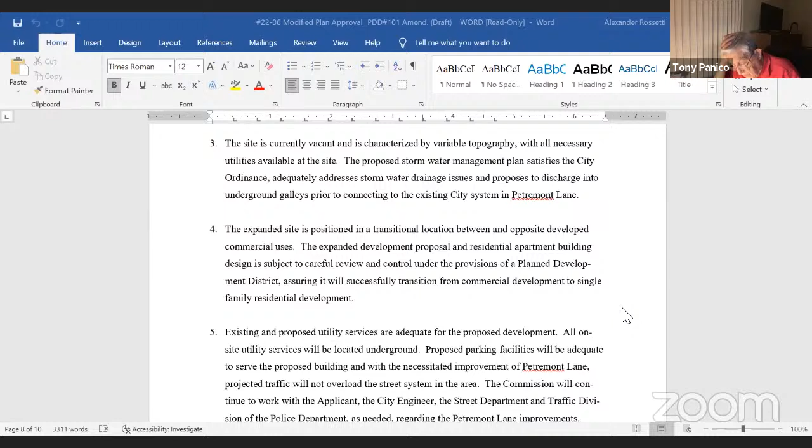5, the existing and proposed utility services are adequate for the proposed development. All on-site utility services will be located underground. Proposed parking facilities will be adequate to serve the proposed building. And with the necessitated improvement of Petromont Lane, projected traffic will not overload the street system in the area.

The commission will continue to work with the applicant, the city engineer, the street department, and the traffic division of the police department as needed regarding the Petromont Lane improvements.

6, the submitted modified final site development plans with further refinement will address all the outstanding concerns of the commission, the fire marshal, the city engineer, and all other applicable municipal boards and commissions. If significant blasting is required, a detailed program addressing all aspects of the proposed blasting must be provided.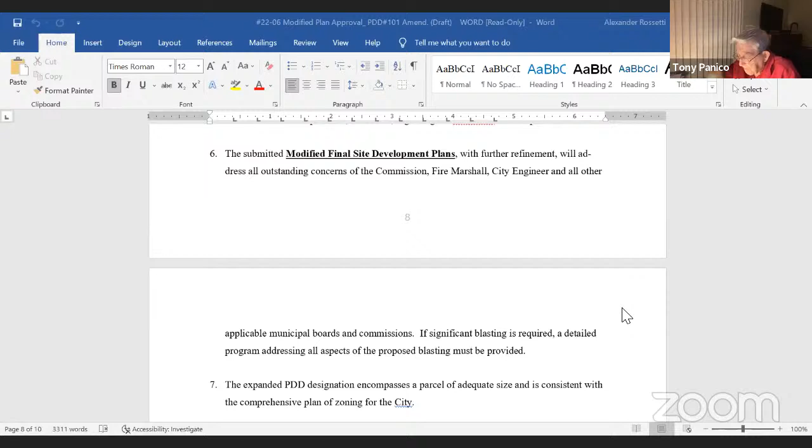7, the expanded PDD designation encompasses a parcel of adequate size and is consistent with the comprehensive plan of zoning for the city. Now, therefore, on the basis of the above, the representations made at the public hearing and other discussions with the commission, the Shelton Planning and Zoning Commission hereby takes the following actions. And we have 2 actions to take.

A, in accordance with the provisions of section 34 of the Shelton zoning regulations, the subject modified final site development plan is hereby conditionally approved, subject to the following modifications, stipulations, and adjustments.

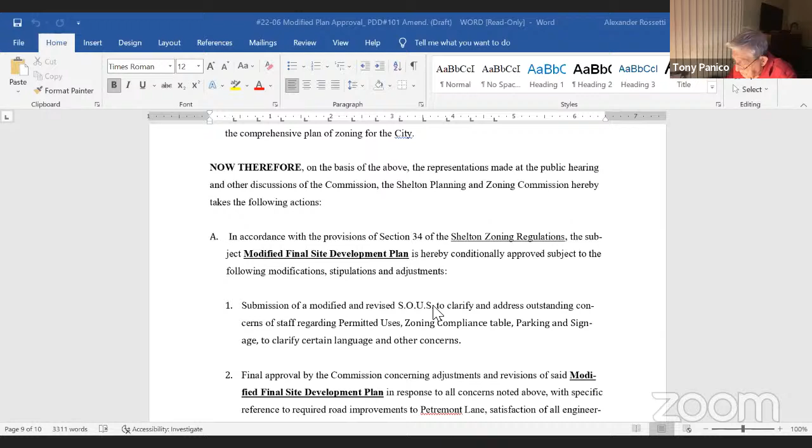1, submission of a modified and revised statement of uses and standards to clarify and address outstanding concerns of staff regarding permitted uses, zoning compliance, parking, and signage, and to clarify language and other areas of concern.

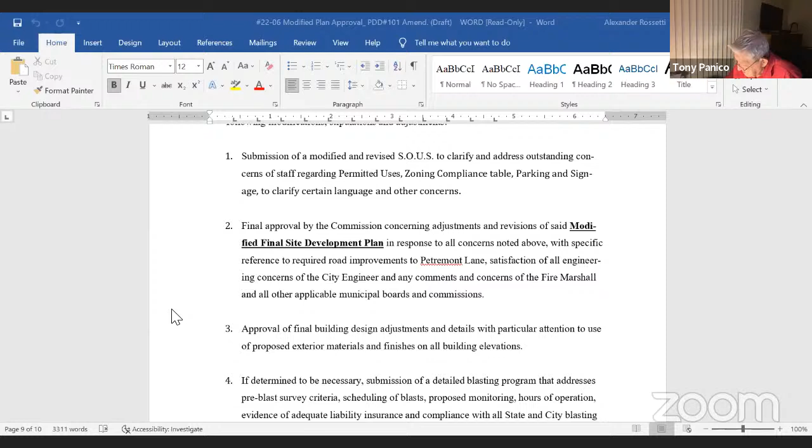2, final approval by the commission concerning adjustments and revisions of the modified final site development plans in response to all the concerns noted above, with specific reference to required road improvements to Petromont Lane, satisfaction of all engineering concerns of the city engineer, and any comments and concerns of the fire marshal and all other applicable municipal boards and commissions. 3, approval of final building design adjustments and details with particular attention to the use of the proposed exterior materials and finishes on all the building elevations.

4, if determined to be necessary, submission of a detailed blasting program that addresses pre-blast survey criteria, scheduling of blasts, proposed monitoring, hours of operation, evidence of adequate liability insurance, and compliance with all state and city blasting ordinances.

And 5, posting of appropriate bonding in an amount as determined by the commission upon recommendation of the city engineer to assure site restoration and/or completion of critical site improvements and other areas of concern.

A separate performance bond is required to guarantee the completion of all off-site improvements to public streets and infrastructure. And a separate bond is required to assure the installation and maintenance of any and all required on-site sediment erosion controls that have to be posted and continued in effect until completion of site construction and restabilization of ground surfaces.

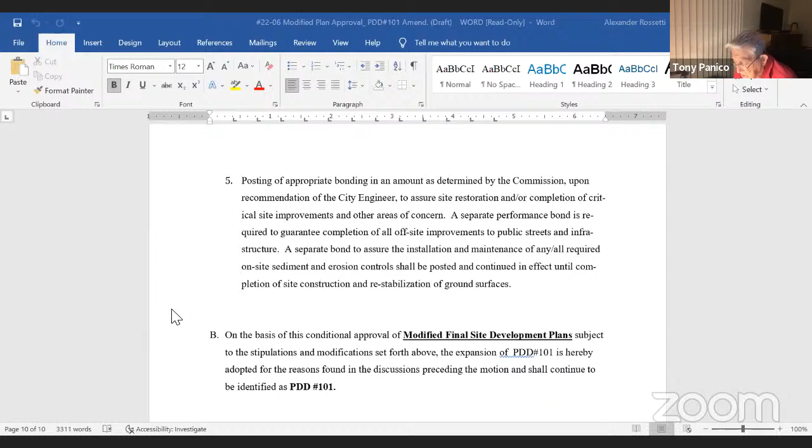And then the second action is that on the basis of this conditional approval of modified final site development plans, subject to the stipulations and modifications set forth above, the expansion of PDD number 101 is hereby adopted for the reasons found in the discussion preceding the motion and shall continue to be identified as PDD number 101. Said adoption of the expanded PDD number 101 as set forth herein shall become effective on Friday, and I'm not sure which Friday it's going to be, at 8 a.m.

If we can discuss the report, we can discuss the resolution or anything else that the commission would like to discuss. Okay, does any commissioner have any questions for Mr. Panico? Any comments about any specific item in this particular resolution?

Do you want to make a motion to move it first before discussion? I think we could do that. So is there any commissioner that would like to move the resolution? Commissioner Parkins will move the resolution. Okay, is there a second? Commissioner Laskos, I'll second it.

We have moved and seconded, now for discussion. The only note I have is that on page 5, number 6, I think it's going to become our new mantra, about getting planning and zoning approval for signage prior to fabrication. Good point. And I think it's also gonna, so number 6, where it says, regarding proposed signage, details should be submitted for commission approval, prior to fabrication. I could put those words in there.

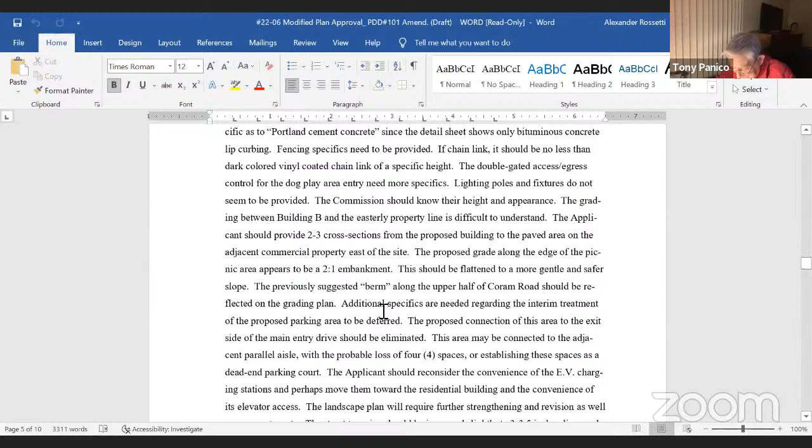I also think it's very important from this point forward to also include them in the statement of uses and standards. Because a lot of times people won't go back to read through these resolutions, but they will read the statement of uses and standards. So I think it should be clearly stipulated in the revised statement for this project.

That's exactly why we really need to put our heads together with the applicant and tell them the areas that we're concerned about and have them change it, rather than me try to explain each and every change in the resolution. It's the same way with some of the minor comments on the architectural stuff. I looked at drawings, but I don't have the benefit of the full scale drawing. So I'm looking at little drawings and trying to figure out if what I'm looking at is answering my concerns or not. And in order to be sure of that, I probably need to have conversations with the applicant, with the architect. But there's nothing that I came across that isn't resolvable very easily. It's clarification in most cases.

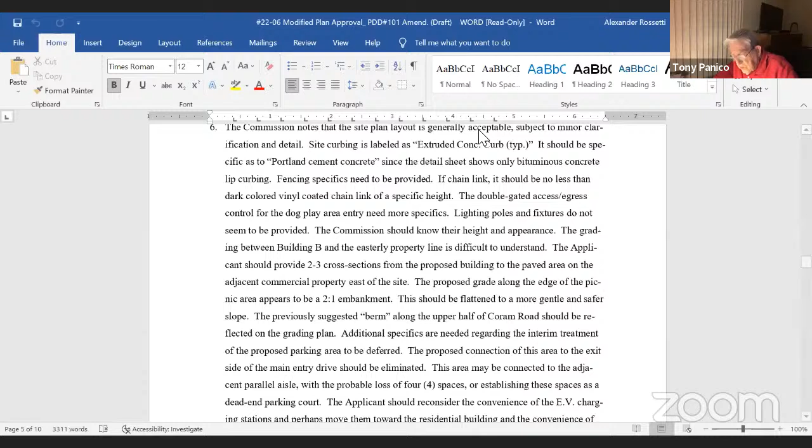Are you referring to a resolution at the staff level? No, I'm saying the resolution of my concerns can all be addressed very easily. It's just that I need to have some one-on-one discussions with their engineer and with the architect and have them explain some things to me that I can't really tell from the little drawings that I'm looking at. Right, but that means it doesn't need to come back to the commission again, does it? It doesn't have to, unless for some reason I end up in a disagreement with them and say, okay, well, this is the way I see it. You don't see it that way. Let's make the commission decide it. So, but I would not expect that to be.

Okay, I have no other further comments. Anybody else have any comments on the contents of the resolution?

This is Commissioner Tickey. I have a question that I'm not sure if staff or Mr. Panico can answer, but I was wondering with regard to the traffic and the traffic study, it says that because of the abnormally low traffic volumes during the pandemic, they didn't do the traffic counts. And so they're using DOT data with a 0.5% annual growth. The table that they show has data from 2013. So I'm not sure if Mr. Panico or staff is aware. Is that the data that they used for this from 2013?

Quite frankly, I can't answer that. I don't know. I thought the traffic study was a very conservative study on behalf of the applicant, and I just don't agree with it. I look at some of the numbers, and I'm not a traffic engineer. Unfortunately, this was not a case where we decided to have a peer review of the traffic report.

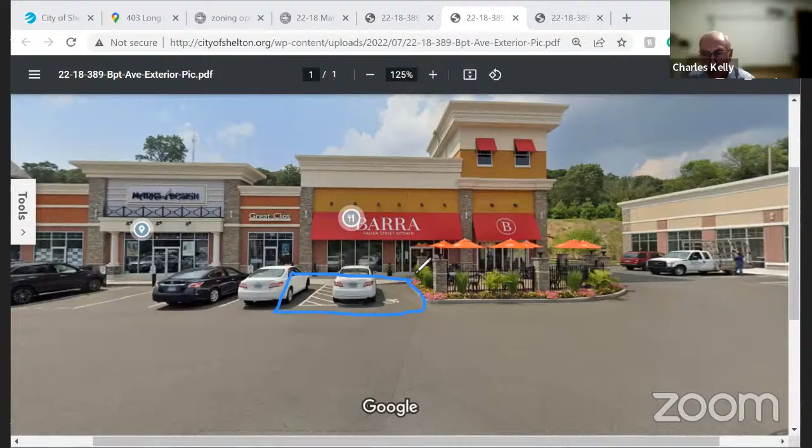Now, they want to extend that area through the handicap, and they want approval for the extension that already exists. Yeah, but then they want to add the handicap after that.

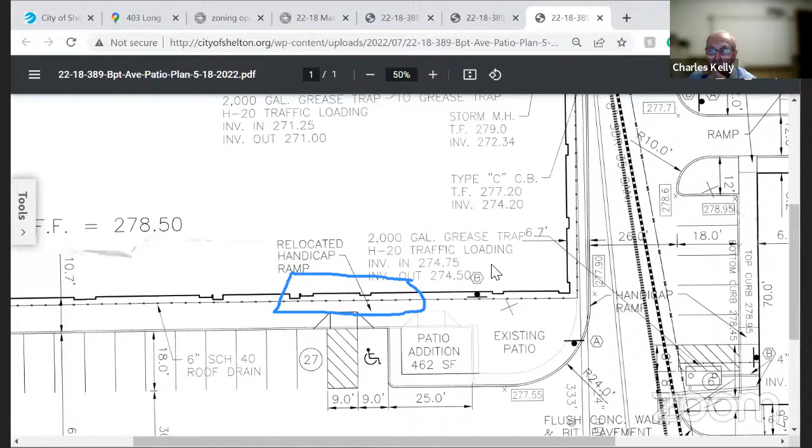Right, now that doesn't give their neighbor a parking space. What do you mean? That's what I said, that in front of their neighbor's door, it doesn't give them a parking space. If you know Marks of Design, they have 4 or 5 signs already saying this is for Marks of Design. Yeah, but they're not intruding onto Marks of Design. No, but they're intruding on their one neighbor, for Great Clips. Yeah, they're intruding right on their neighbor. In other words, they took their neighbor's spot.

There is nothing on that. Whoa, whoa, whoa, this is a shopping area, there should not be assigned places. I know, but they have it reserved. The only ones that have reserved is Marks of Design, for some reason. And Great Clips, Great Clips has a sign as well. They do? Yes, one. Yeah, but that will take their sign away, won't it? Probably.

So I'm not quite sure, I guess that's with a tenant lease, wouldn't it be? Right there. Reserved for Great Clips. Yep. Great Clips, they have 2. They have 2, yeah, so they're taking one away. I think what we have... no, two. Unless they've already taken one away with the rug. Is that what you're saying? Yeah.

When the handicap space was covered up because of the extension of the outdoor dining area, it was not replaced somewhere else. And that's what we have to decide. Is it more beneficial, who's it going to benefit more? The handicapped person who needs to park by that area of the plaza, or are we going to leave it as is and have a retailer have 2 regular parking spaces?

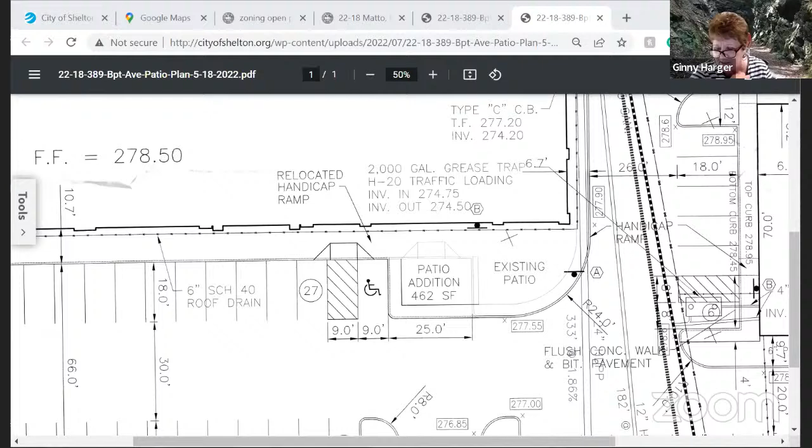Right, okay. So, Mr. Mallozzi, can you identify yourself, please? I am one of the owners of Matto. Okay, one of the owners of Matto, okay. And your address for the record, if you wouldn't mind? I am building a house right now on 30 Winthrop Woods. I was on 28 Pier Main, I just moved, moving to Shelton again. Okay, that's nice. All right, so in any event, I see Mr. Blakeman, you are on the screen.

Do you plan to participate verbally? Guess not. I've had talks with Jimmy anyway about wherever you guys need me to put the handicap ramp, I'll put it. If it's got to get moved a little further, I'm fine with that too. I don't believe a space with someone's name on it means anything, right? We don't do that. What we're trying to accomplish here is to have the outdoor dining space approved for Matto. We're trying to reestablish that handicap space. All right, so throwing out to the commission, how do you want to accomplish this? I think it needs to be in the front of the building.

Ruth, can you guys hear me? Yes, go ahead. Yes, it's Jim Blakeman, 96 Bighorn Road, the owner of the plaza. The tenants really like that spot there. I'd prefer to move the handicap space someplace else in the plaza if we can. How would that be generated? There was a complaint by a resident who has to bring a spouse to the urgent care medical center.

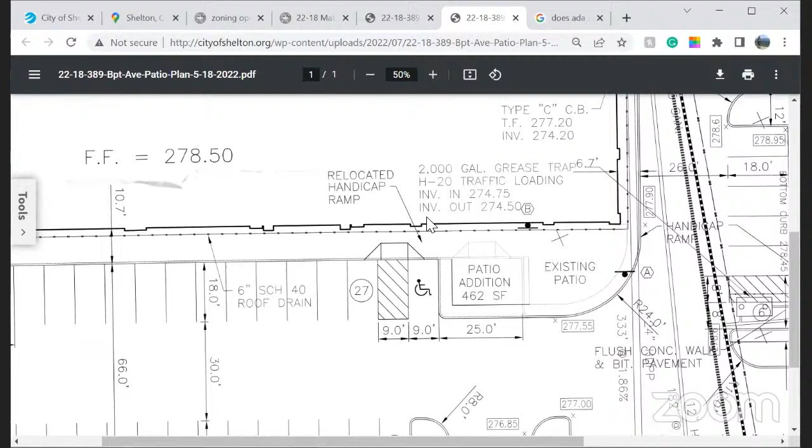Sure, you know this was the existing area here. They're basically- and some of you have probably seen it- they would like to extend that patio across the front. You'll see there's a little bump out for a pilaster column here, which looks like this guy right here. So this treatment would be extended across the front here up to the inside line of this column, which would be in front of what is now Matto.

How do people get into the restaurant? Do they go around the patio or through it? The main doors are right there. And correct me if I'm wrong, Mario, but I believe this patio area- it's kind of tough to see from this view- but this walkway is preserved in here behind these patios in front. There's a concrete walkway to Matto.

There's a square patio. If you saw what we did with the patio, right now it ends directly in front of Matto. And the only thing is, with what we did, we took up the handicap ramp. If I do this, I'll have to get rid of this handicap ramp altogether, but my patio is going to be in front because it's basically a trip step.

So you're going to the end of your storefront area there with the patio. Exactly, and I'm trying to match that patio exactly what it is. So again, you go around the patio to get to the front door somehow? Same way you enter now, but that patio comes out another 20 feet or whatever, 16 feet.

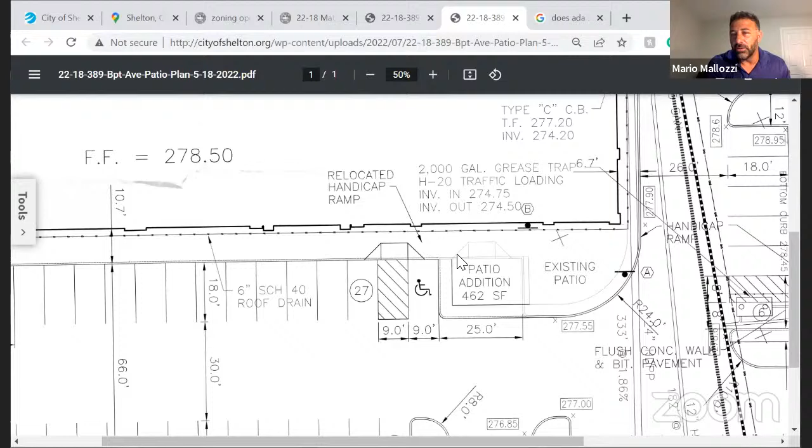The patio will be extended, but will the entrance stay where it is? Yes, it's going to be extended to where the patio starts. I'm moving the patio over 20 feet, so the entrance will be 20 feet earlier.

Don't you need a gate there for people? No, no, there's a gate on the other side, but this is just wide open. Once you get past the last column in front of our doors, it's wide open so you can walk in. There's about an 8 or 9 foot sidewalk, then you can walk in the doors. There's no gate, it's just a walkway.

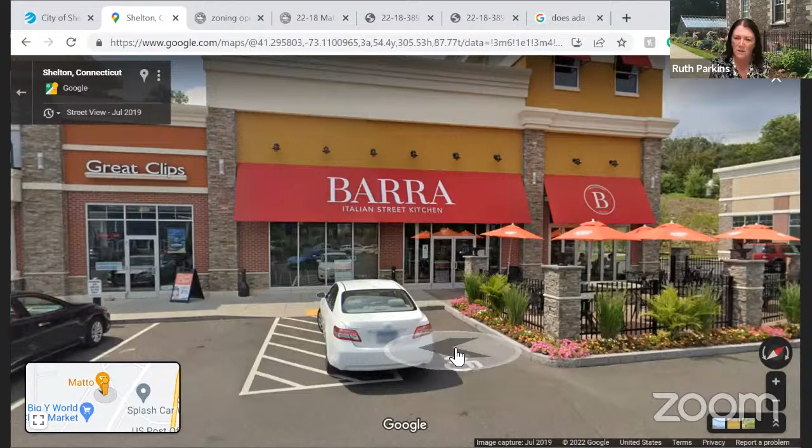Isn't there a liquor commission rule that it has to be gated in for underage drinking, for an outdoor patio? Well, they don't have it now.

I know, obviously—don't tell anybody. They don't have it at Amici's either. That's just the sidewalk. I can think of about 50 restaurants like that, but that wasn't an approved patio, that was just a COVID expansion of dining. This one we're looking at doesn't have that though, right?

No. Alex, would you look in your emails for May 13th? I sent you pictures that I had taken.

Tony Panico, maybe you can respond to that question—do you have any input on that? On where to put the handicap space? No, on the liquor question, whether the patio needs to be gated or accessed from within. I honestly don't have an answer. I don't know whether state liquor law comes into play or not.

I think every outdoor patio we've approved—at Stormy's, the new Mexican place—we've had to access it only from inside, through doors. But there are a lot of places where indoor dining has spilled out onto the sidewalk, and it's not enclosed, so I don't know. It's got to be in those COVID regulations, the tables they put outside, but I don't know if that was just a temporary COVID expansion.